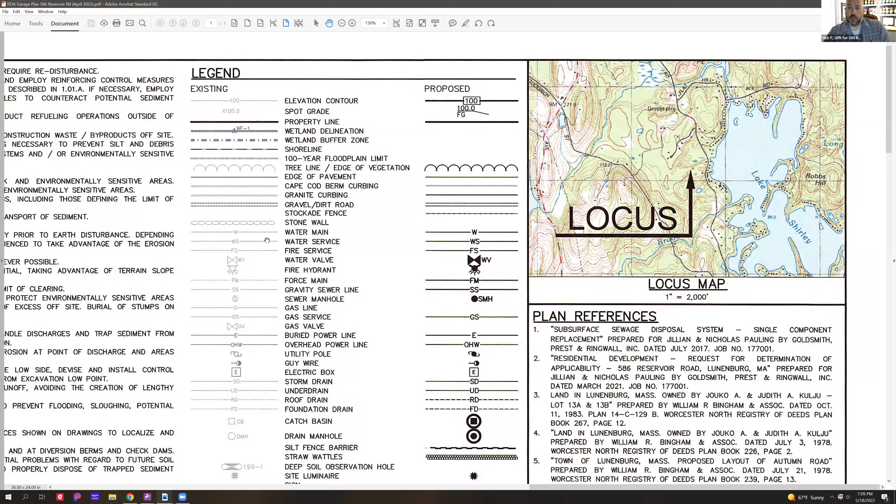Should see a portion of a plan - a locus. Everyone see that? So again, my name is Nick Pauling, owner, representative, all in one. It's an RDA, as Mr. Chairman read, it's on the west side of Lake Shirley. This is Reservoir Road here, this is Autumn Road. This is a large wetland. This is what I affectionately call the North Pole during the Christmas season with the tennis courts that put all the lights on it. I'm about 800 feet off the road, up about 40 feet.

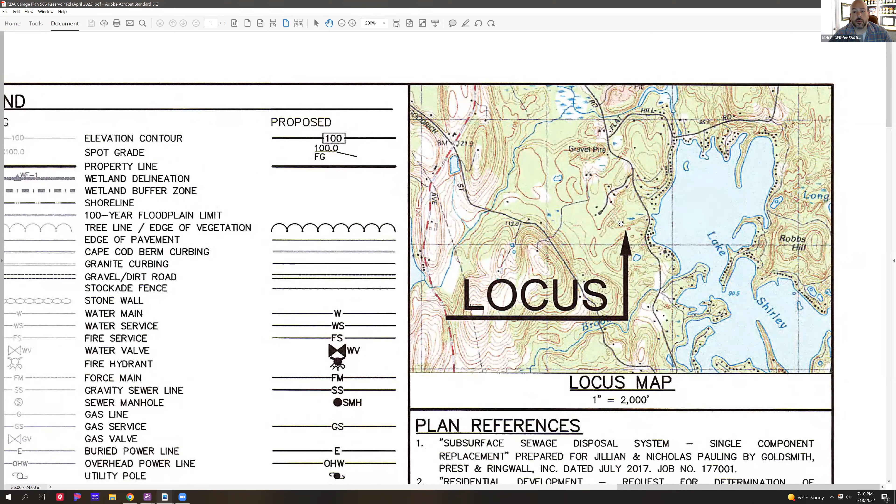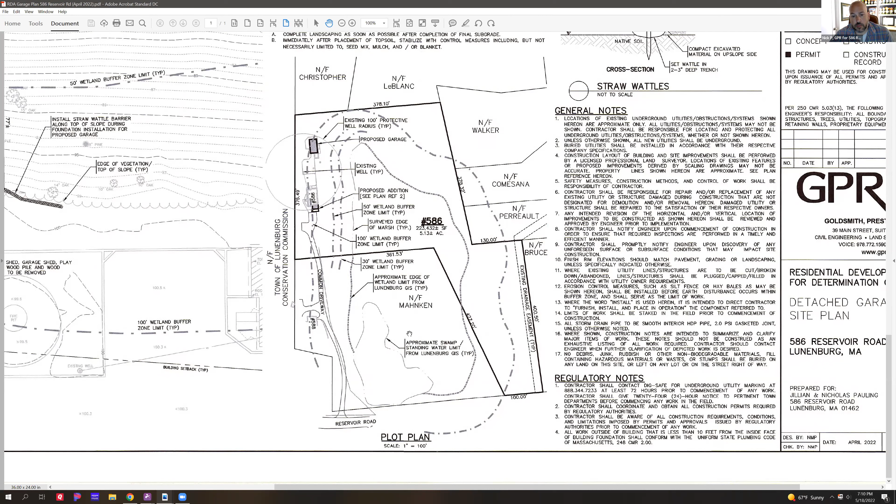What you'll notice if I come down to the plan here, Reservoir Road is now at the bottom. The property is accessed by a common drive that goes by my neighbor's property, comes into my main dwelling, and what we're talking about tonight is all located here in the rear of the dwelling or the property. What you'll notice is this is a large marsh area that encompasses the majority of my property as well as my neighbor that I share the common driveway with.

As we keep going over to the site plan, you'll notice there was a laundry list of things in the public notice, including what I call garage shed, a wood pile, a swing set shed, the play area, and then this is the former above ground pool. There was an 8x8 pool shed here, as well as an above ground deck. So the proposal is basically to clean up all of those areas and construct one large storage container. I called it a garage just because it will have a garage door. There's no everyday access to this.

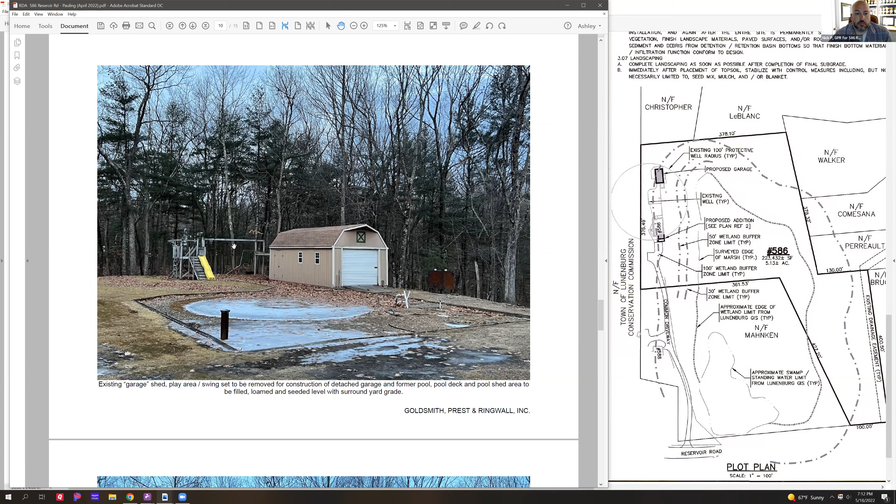Long term, hopefully there'll be a camper van parked there, but that will be driving across my lawn to get into it. I have the package that was submitted, the RDA package, included these photos. I think this speaks a little bit more - pardon that, I was planning on doing this last fall, hence the leaves and the ice. But what you'll notice in the foreground is the timber depressed area, the circle here is where the pool used to be. This is what I'm calling the garage, as it has a roll-up garage door. And then you'll see the swing set in the distance, side view, same garage shed.

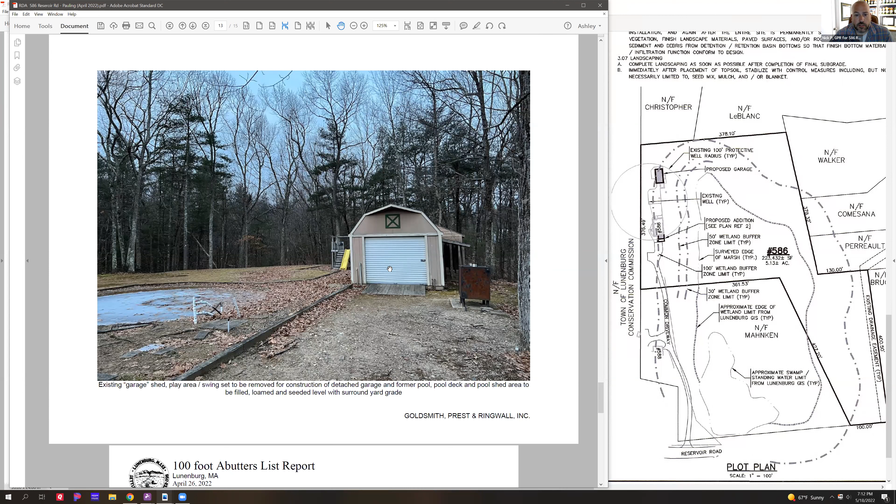This is the hidden play shed and the swing set. And as I continue to go down, what you'll notice is this is the rear view. This is the beginning of the slope that goes down to the marsh. And then this is just a front view again, which also shows the wood pile. So there's erosion control proposed along the top of this slope leading down to the marsh, while this is being demolished, excavated to put in the slab on grade foundation. This depressed area here, you can kind of see the change in grade from the grass down to the stone area where the pool used to be. The removal of all these subsurface pipes, really just trying to clean up the outside yard.

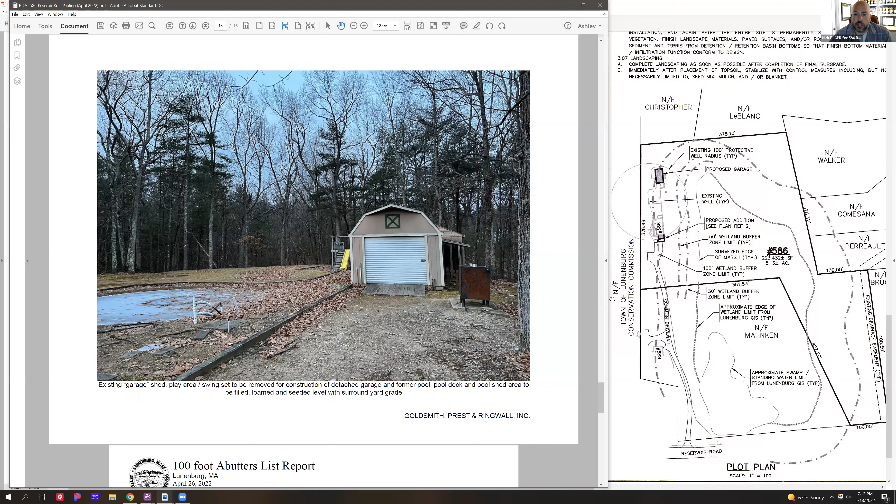That's the application. I can certainly change from this to the plan or anything else, or answer any specific questions the commission may have.

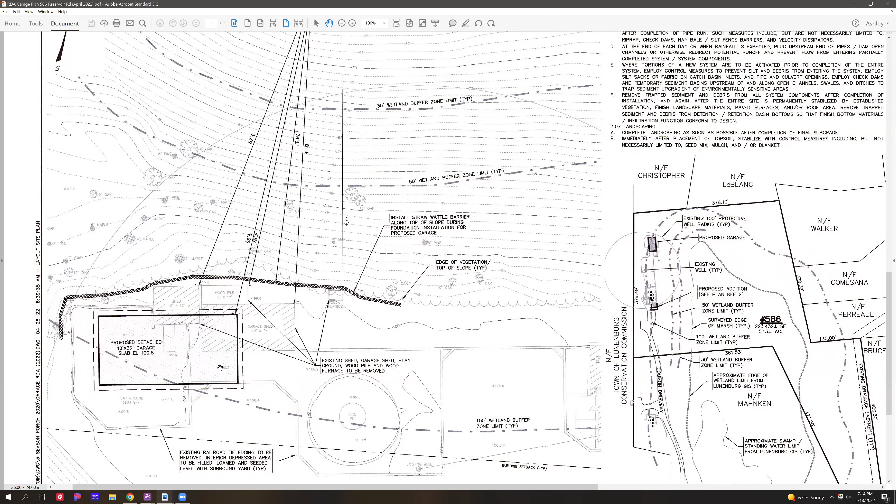Just a quick question, Nick. The original application we have on file, which I brought up, was showing some work in front of the house - a deck and things like that. Was that removed from this application?

No, it was actually an application that I submitted and you issued a negative determination in March of 2021. During that time, as you know, some things went a little crazy. I've ordered windows for that, but they've taken 18 weeks, so that is momentary as far as work.

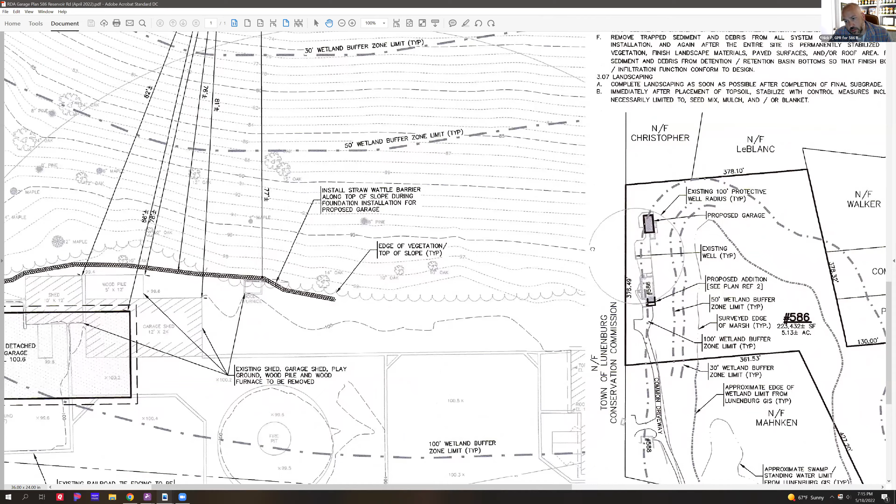If I zoom in on this picture, this reference here - proposed addition, see plan reference 2 - that was this area. So that was previously approved. Yes, sir. So that whole application then was a previous application. It appeared so, yes.

I don't have any further questions. When are you looking to do this - this summer? Hopefully, if the materials are available, the contractor doing the addition is able and willing to do this. We'll see if I can harvest from the money tree to actually make it happen.

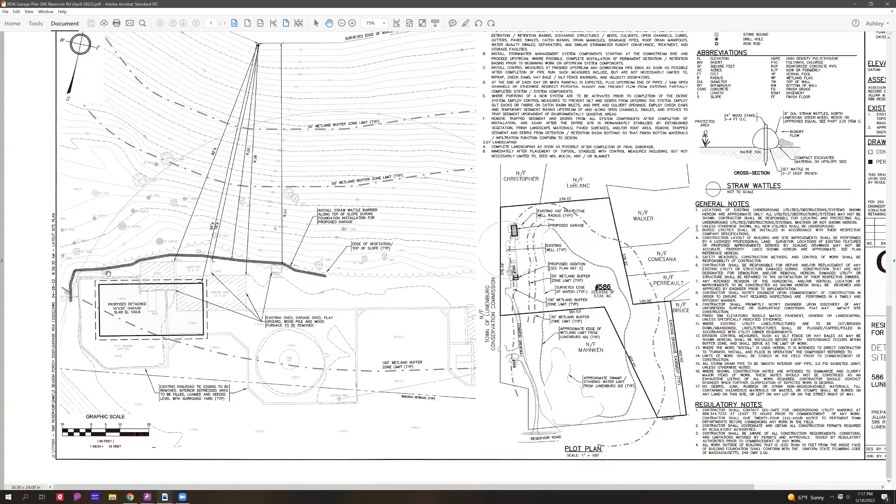Okay, great. Seeing no other questions or comments from commissioners or public, I will accept a motion for a negative determination. So moved. Second. Motion by Jack, second by, sounded like Katie. Yep. All right, roll call vote.

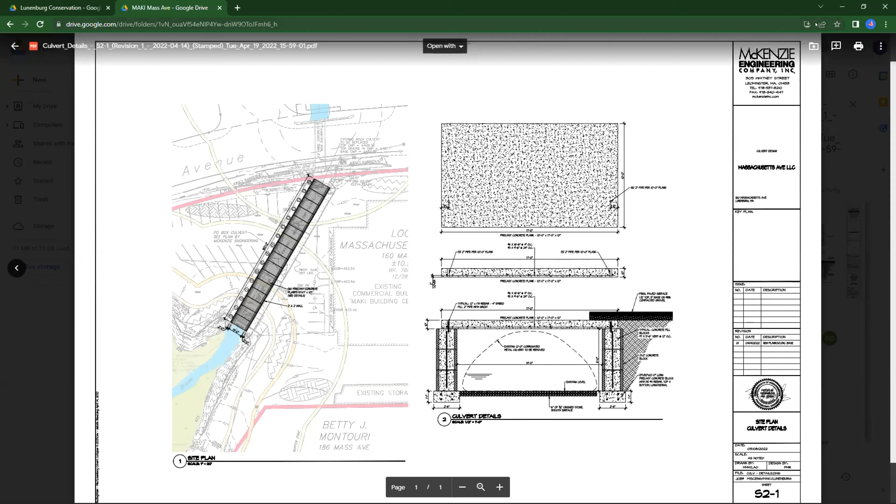So at this point, I think it would be safe to close the hearing and issue an order of conditions, if the commission so desires. At this point, do we have any questions or comments from commissioners? I'm seeing no hands. Any questions or comments on 160 Mass Ave from the public?

I see none. At this point, I will accept approval of this notice of intent with a standard boilerplate order of conditions for 160 Mass Ave.

So moved. Second. We have a motion and a second. Any other discussion? Seeing none, roll call vote.

Patty Adams, aye. Katie Childs, aye. Jack Rabbit, aye. Jeff Viviano, aye. Mike LaRouche, aye. And I for myself. All right, Matt will issue that order of conditions for you.

Okay, thank you. You're very welcome. Thank you, gentlemen. Okay, have a good night. You too.

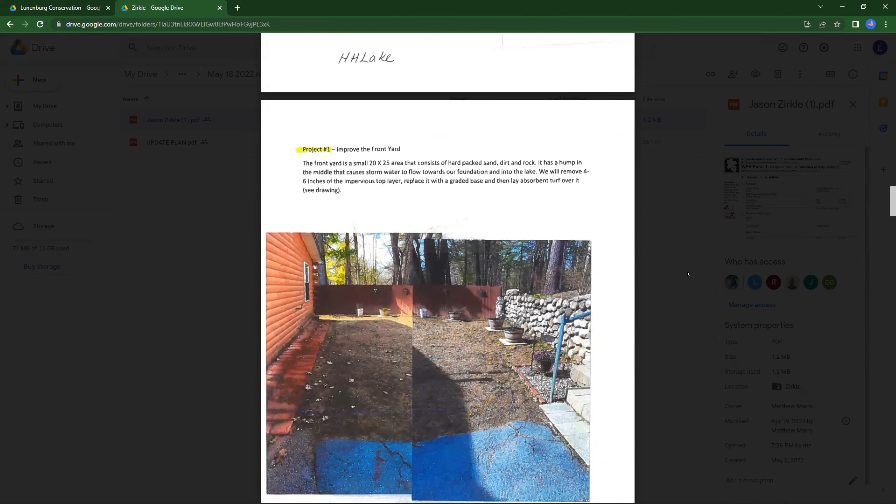If you could scroll down a little bit. Keep going. All right, yeah, at the top of that page it's kind of a description of what the pit is going to be, and at the top there is the install drainage area. There was a second page I had submitted with the updated buffer zone pages that just kind of showed the pit's 4 feet deep by 4 foot wide, the full width of that driveway area, filled up with some stone to try to catch some of this stormwater that you see running down through there.

Rich, I got it, just give me a minute to upload. Okay, and it's gonna go from the house out to the edge, out to the garage, basically. Yes, sir. Okay?

And you're just vinyl siding this garage here? Yes, sir. And the little shed that's up there, that's also number 4, just vinyl sided as well to match. Okay, no roof work, no drainage work, no digging, just putting vinyl siding on it?

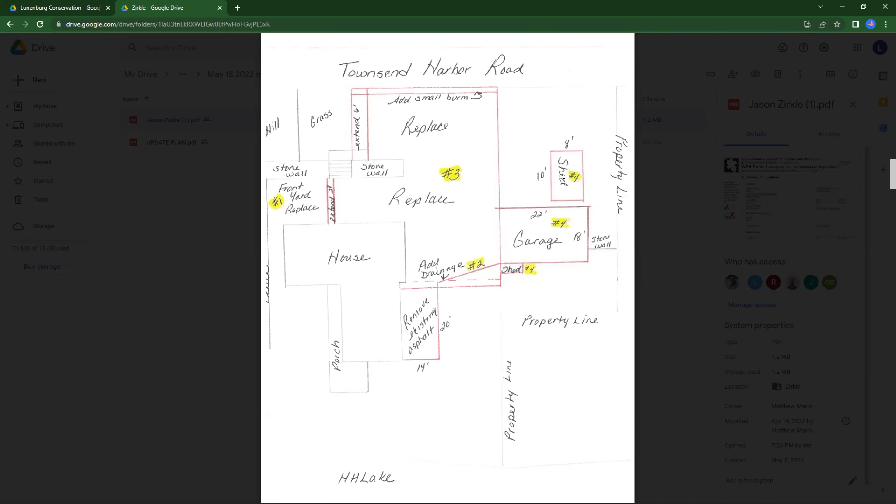The shed up at the top there does have a lot of moss on it. I would like to replace the shingles. I don't think they need to actually be removed, it just should be able to go right over the top of them. Okay. Yeah, as long as you're not doing any groundwork, you really don't need any approval from us for siding the house or putting a roof on it, or replacing the roof that's there. Okay, thank you, sir.

Okay, the only part that I personally have a little bit of a problem with is this berm that's redirecting the water flow from Townsend Harbor. I personally, as one member, might suggest trying to talk with the DPW just to make sure that we're not moving that water to some other place that's going to cause a problem.

Okay, yes. Somebody else had mentioned also talking to DPW about that, adding a berm there or something. I know when they just repaved Townsend Harbor Road all the way through, there were several areas where they added stuff like that onto other people's property. I was just hoping, once we get the driveway replaced, about getting that done. I didn't want them to add it now on the existing driveway where it's going to be removed.

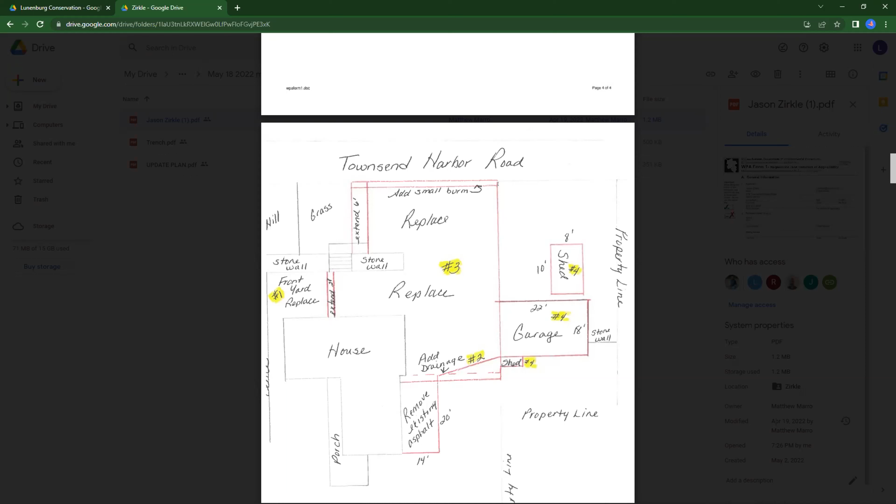Rich, on the cloud I just uploaded a file that says trench, that was the second page. Okay. Yes, I don't think I can rotate this. I can't, what the? All right, try right-clicking on it, Richard, that might help.

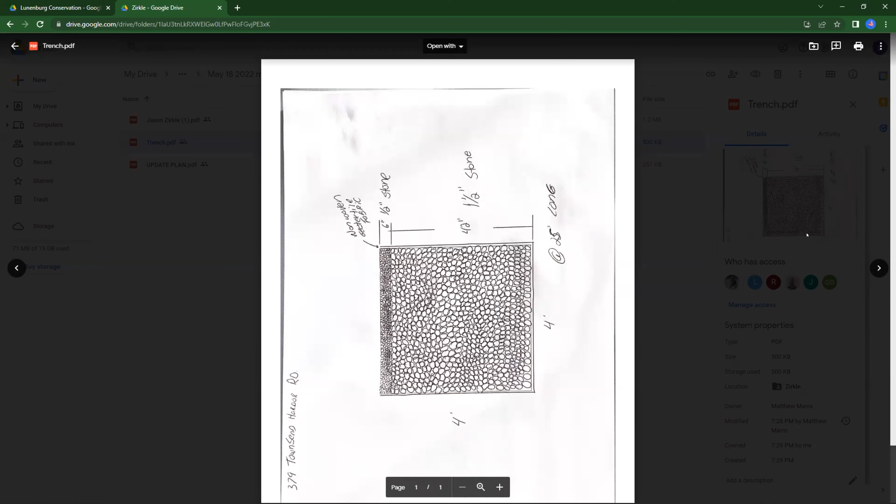Yeah, unfortunately, without opening it I'm not sure, but it's pretty straightforward. The dimensions are gonna be 48 inches by 48 inches, filled with stone, with geotextile fabric on 3 sides to keep the soil from infiltrating. Yes, sir. And there will be no outflow from the trench, the trench is just to allow percolation into the soil. Yes, sir. Okay.

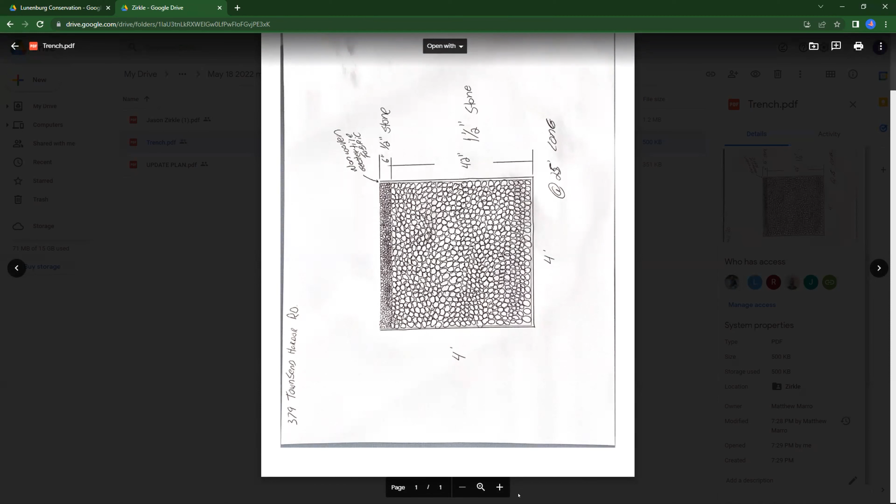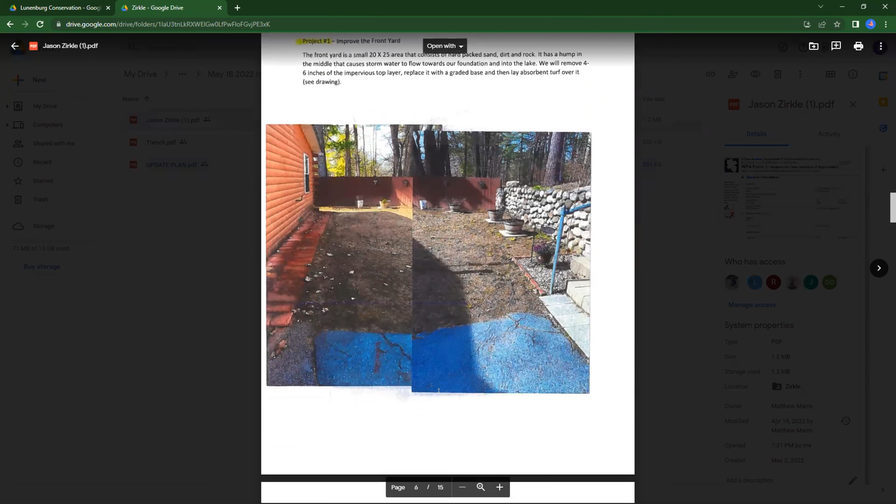Mr. Chairman, this is Jeff, I just had one question. Yeah, go ahead, Jeff. If you go back to the pictures where he wants to put that little swale in by the house, is that where those red bricks are? Let me just pop back here, so it's kind of a split shot of the front yard. Yeah, right there, is that where you're intending to put that swale in by those, like where the bricks are?

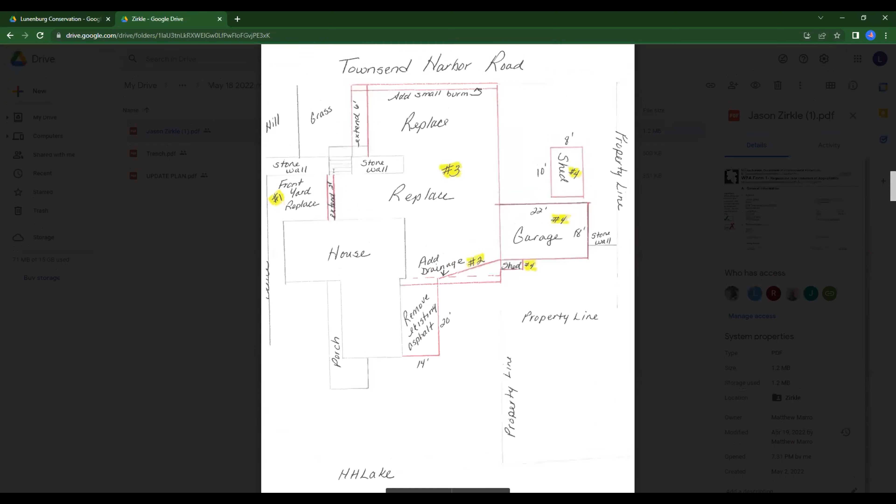No, sir, this area here is just where we had petitioned to replace the couple of extra feet of asphalt to get out past where those stairs are right there. And then that front yard replace area was actually just some turf put down. That's where my septic system is, and it's just all sand, so there's no grass growing there, so we were just gonna roll out some turf just to make it look decent compared to what's there.

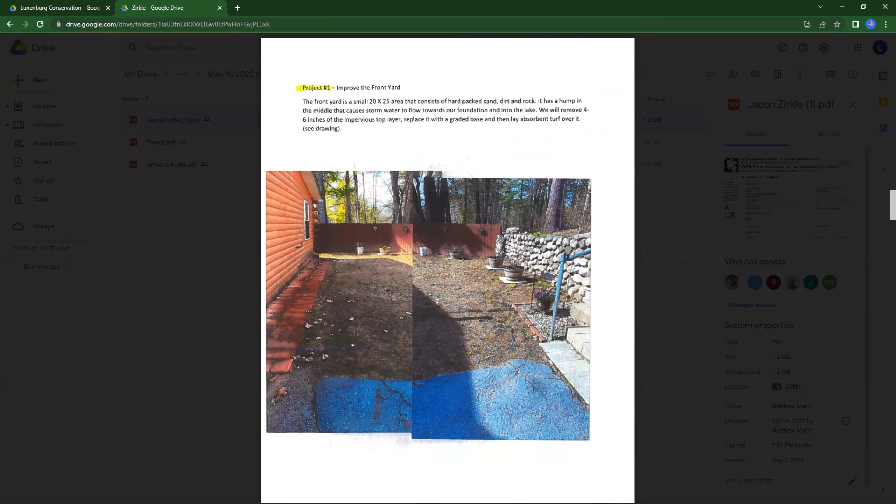Okay. Yeah, I saw the turf today when I was out on site with Nadia, I was just wondering what that was for. That's for that area there, sir. There's two rolls of turf there. And this is where you're putting it? Yes. Okay, all right, thanks, Mr. Chairman. You're welcome, Jeff.

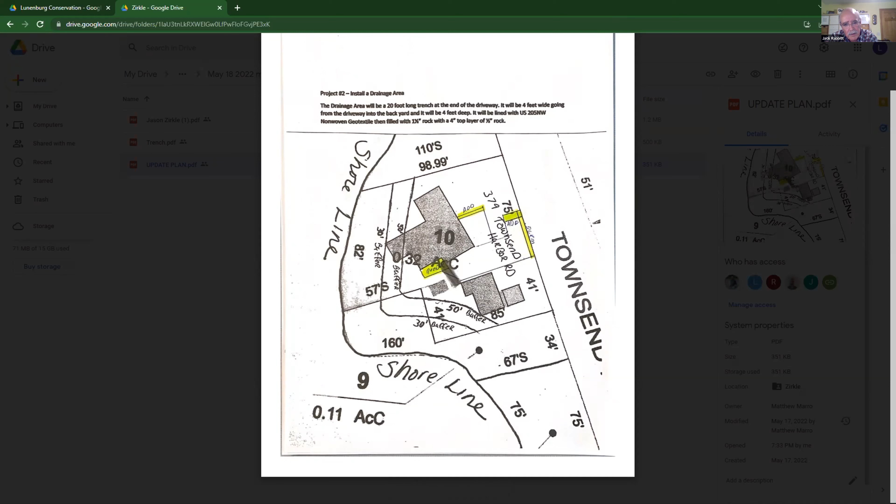Mr. Chairman, if we could also note that pit they dug was within the 30 foot mark, and I don't believe there was a permit pulled for that. All right, and where is the pit, Jack? It's not on the property we're discussing. If you follow that about 30 feet, it runs basically down towards the lake. In fact, one of the pictures would show that.

I was kind of interested in that, but I haven't really pursued it. If you take a look, Mr. Chairman, keep going, I believe you can see part of that pit right there by the dock area. He's dug quite a bit of a trench all the way down through. I thought, oh, that's interesting. Somebody's going to have had a couple of drinks and go and trip over it.

Exactly, well, exactly. I thought, okay, this is not on the property that we're looking at, but I noticed that it was a disturbed area within our no-touch zone. So I was just wondering, what are the plans to accommodate for the overflow in that area from your perspective? Because the water's going to go someplace, as our chairman pointed out last meeting.

So the trench is not on the applicant's property. That's correct, I didn't go any further with it. All right, so at this point, unless we took action against the neighbor's property, the applicant can't do anything on the neighbor's property to address the trench. Is that what I'm gathering? Yeah, that would be correct.

The water is flowing off that hill. If you look at the whole topography of the area, you've got a pretty steep decline. I'm betting it's a good 10 feet from the height of the road down to that area. So you're pulling water in no matter what. I did watch the video with the water pouring, sheeting off the roof of the applicant's house.

Rich, I did take a look at the topography available through the assessor's office, and he does have a knoll that basically turns the water, probably in the middle of your backyard, and it rises up and causes that water to push in exactly that direction. Yeah, you'd have to take a considerable amount of that knoll out to redirect the water to a different area, and then instead of running it through the neighbor's yard, it's just going to continue to run through my yard. That whole end over there is all lake and cove.

Right. The proposed trench - right now there's nothing there. So if this trench seems to be the issue, I hate to eliminate it because I'm assuming it's going to catch a lot of this runoff and slow down the erosion that's occurring here. But...

Plus you're pulling up some of the blacktop that's going downhill and removing that as well, right Jason? Yes, there's almost a 300 square foot area of blacktop being removed, plus you put in the other piece, so you're adding more percolation capability there.

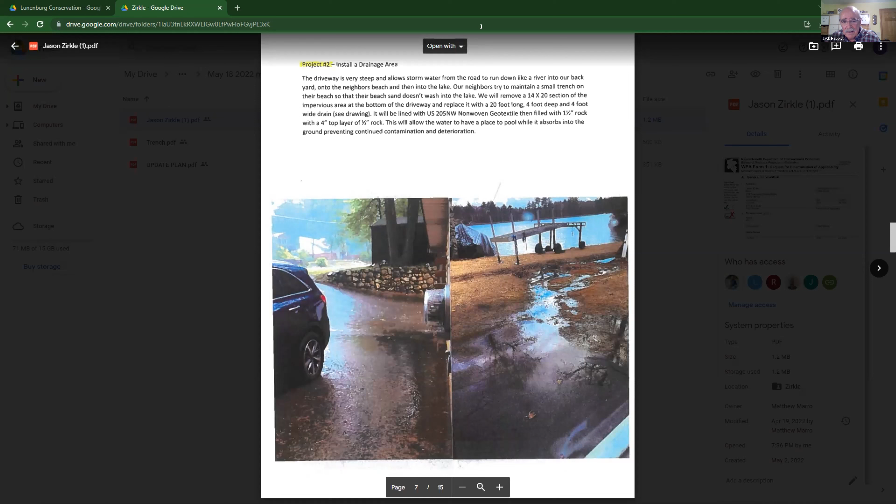Since there's no other outflow to attach to, are you going to put another storm drain in? Should we ask the town to put a storm drain in? It's coming off the road.

Okay, so moving forward at this point, are there any other questions from commissioners? Please raise your hand. Seeing none, any other questions from the public?

All right, seeing none, I'll accept the motion for a negative determination at 379 Townsend Harbor Road. So moved. Second. Motion by Jack, second by Patty, roll call vote.

Patricia Adams, aye. Katie Childs, aye. Jack Rabbit, aye. Jeff Viviano... Mike LaRouche... and I for myself, that's 1, 2, 3, 4.

All right, that was an aye for me. Oh, Rich, what'd you vote? Aye, I voted aye. Okay, Jeff's still muted. Okay, I'm sorry, I voted aye. If I cut all out, alright, there. So 6 ayes.

Thank you very much. Have a good, good luck on it now, Jason. Tell us how it turns out. Thank you, I will. All right, moving forward to Rob.

Pursuant to Mass General Law, Chapter 131, Section 40, as amended, and the Lunenburg Wetland Bylaw and Regulations listed in Chapter 239, the Conservation Commission will hold a public hearing on a request for determination by David Blatt for the removal of trees at 411 Goodrich Street. Do we have somebody here for 411 Goodrich Street?

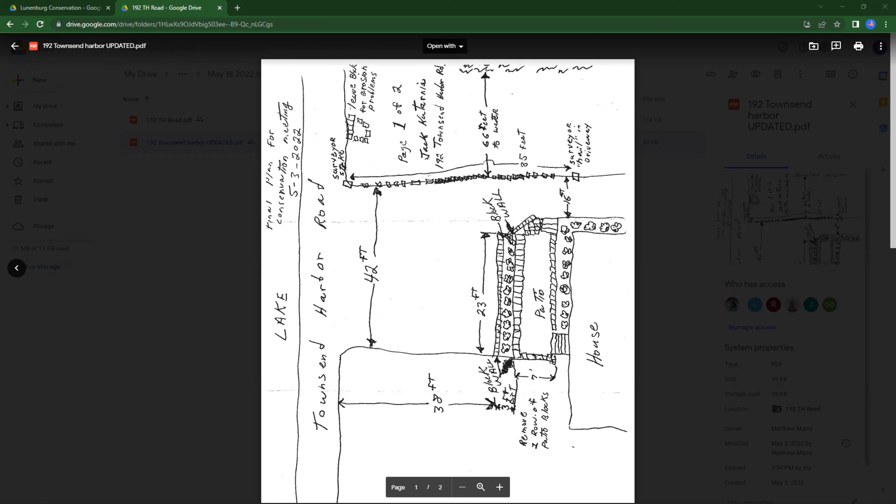The other one that hasn't responded, and again, I apologize, I can't remember which one it was, I have it in the file. I'm going to be sending it to town council for secondary action at this point. So essentially, we should have further updates coming for the next meeting because that was the deadline, the end of the month.

Updates on maintenance work at Hollis Road, Matt? We're still working to try to get people out there to do bids on replacing the windows. I believe Bob had a couple of leads he was pursuing. I'll review that with Bob over the course of the next week.

All right, great. Moving on to violations. 238 Fire Road 16. We do have the Magurns here. I'm assuming we can start with them. I believe I was not present at the last meeting unless something was discussed. Do we have a plan of the current site conditions and remediations proposed?

David Ross sent that out two weeks ago, yesterday, in fact. Should be on the Google Drive. All right, let me just bring this up. Does this look like it? It does. Okay.

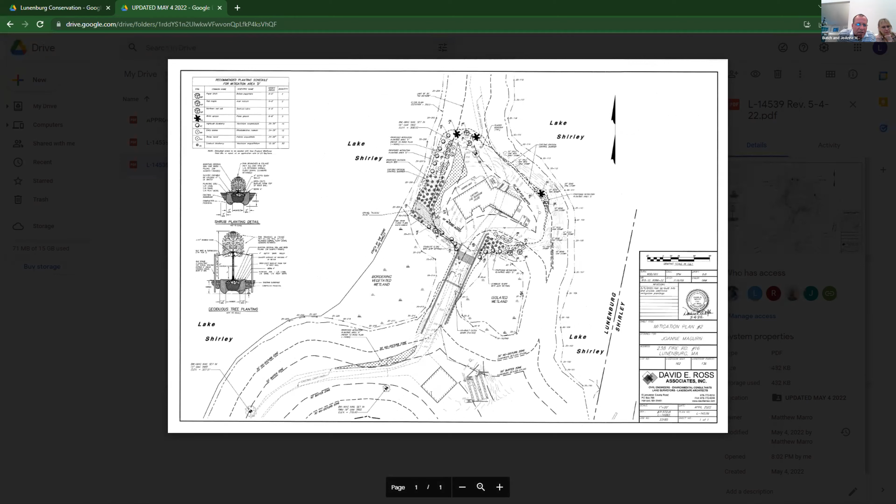Did Ross happen to present a narrative as to the extents of the violations? It's a little hard to see it with all of the stuff on here, to compare what we have to what was approved. I think other than what you see here, Rich, is the only thing he's prepared. However, if you bring the plan back a little bit, he did prepare a remediation area. He actually did the calculations for the area for the floodplain, which is on here.

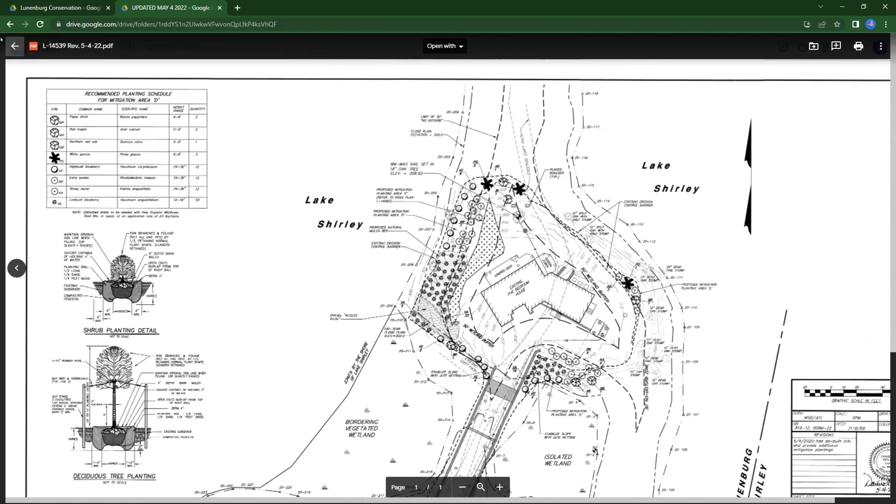I think what you're saying is the as-built, Rich. The alterations are outlined in the plan details. I think what you're looking for, you'll see on the as-built. That's another plan. Okay, here we go.

So you can see in the shaded area where the driveway was proposed and where the driveway is now. I think that's what you were questioning. Not sure.

Well, there was quite a bit of violation besides just the driveway, Jeff. There was all the grading over here on the northwest side, and there was grading and intrusion over here on the easterly side as well. Then you have to go to the southerly side. I just wanted you to see the approved plan, that's another plan if you wanted, yeah.

That has all the original grading. There you go. Yeah, so our grading violated here, up here, and took this whole berm out here. Exactly.

And at this point, there's no walkway, I don't believe, out to the water here that was approved. Sorry, Mr. Commissioner, can I comment on that? Certainly. So that was one of the things we last left off last year when this plan was approved, with the verbiage that we still have to present a dock and the access way to the lake. Okay, so in the new plan, that's what has been presented on the access to the lake.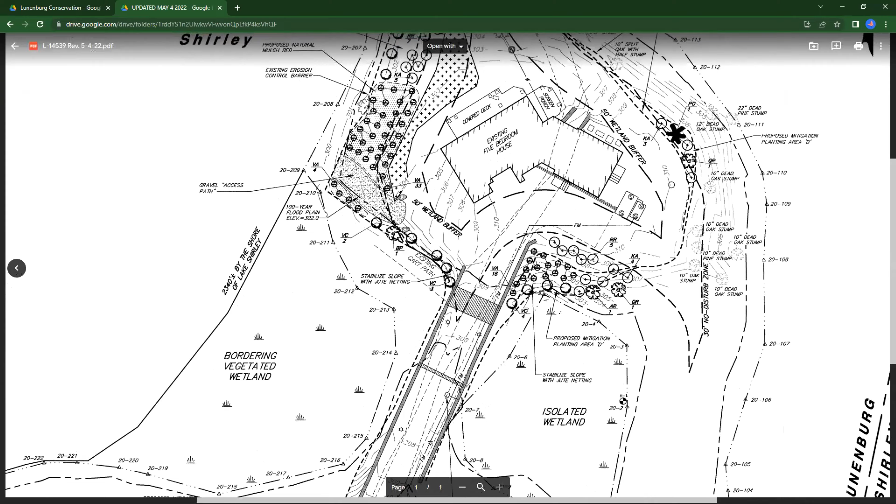The only other issue I wanted to raise, in the area where, if you could pull up the other plans, Rich, the planting ones. Yep, that's the one, thank you. So the planting plans look good, they have some positives to them.

The only thing I would recommend is in the area where you have wetland flag 20-208 on the left-hand side, the plantings suggested there appear to be low bush blueberry. If I recall correctly, there was denser, higher shrubbery that was greater in height than low bush blueberry. Low bush blueberry makes a great ground cover for hillside stabilization, but there were other shrubs that provided more natural shading to the area, which low bush blueberry won't accomplish. So you could scatter some low bush blueberry in, but I think that portion of the planting needs to be adjusted to have hardier plants, and maybe add a couple of extra trees there as well.

The vast majority of the other plantings look pretty decent. So would you recommend, Matt, putting another tree to the left of the existing tree bank there? One more tree? Is that what you're recommending?

Well, I'm recommending a lot more than one, but I would take this back to Brian Butler and have him draw something that's conducive to better cover, something that grows a little higher and is more in line with the habitat.

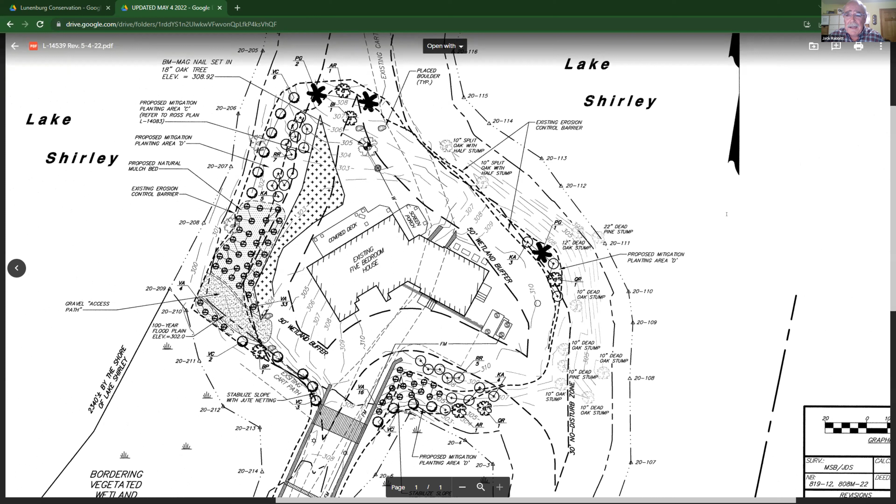Jack, okay, just stay on task, I'm sorry. I'll stop. Thank you, Mr. Chairman. All right, has your engineer signed on yet, Butch? Yes, I'm here. Okay, Brandon.

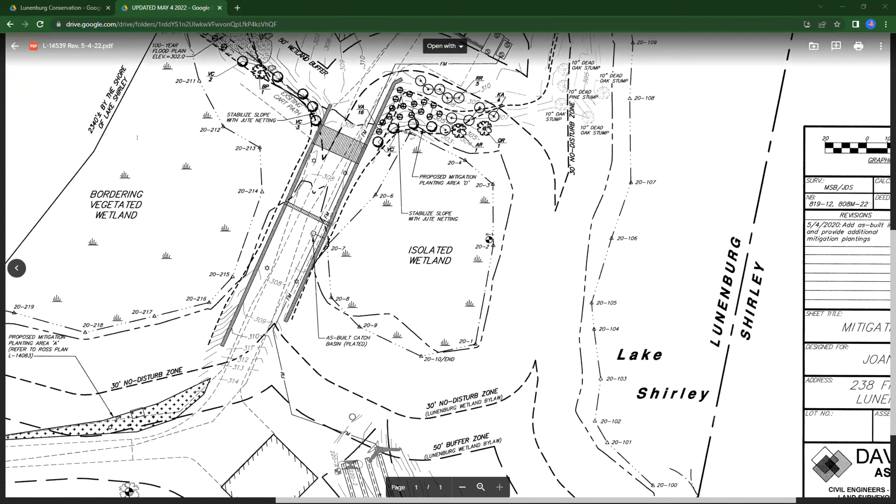Mr. Rabbit did bring up a point about the rest of the driveway. Was the rest of the driveway constructed as approved in the order of conditions? In terms of, we did an as-built survey from the existing garage to the house. So is the question pertaining to kind of south of the existing garage? I believe we had asked for an as-built of the site - the site would start where the driveway starts and comes out to the end of the peninsula here where the house is.

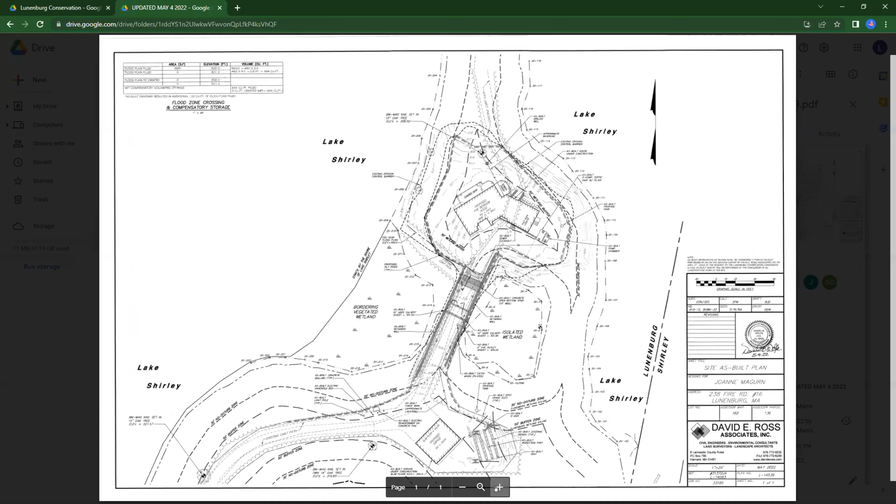Obviously not being on - I was on last week's meeting, that was very late, but prior to that we were not on the hearing. So our directive, what we did is we located the as-built driveway from the existing garage to the house, and we also picked up a couple of features - there was an electric transformer, some bollards, and some features like that. The rest of the driveway is pretty much exactly as shown in the approved plan, but we do not have an as-built of it. So you're stating that the driveway is constructed as was approved in the order of conditions, or you'll need to produce the as-built to prove that?

Yeah, we would obviously have to show that on an as-built plan. So, Mr. Commissioner, yeah, because I did mention this too when I was out on site, there's quite a few construction items that weren't on the plan as far as light poles and bollards and so on. Correct, yeah, so what we try to do is pick up all those features to present to you.

And we'll go through the rest of the commissioners. I myself would like to see the entire as-built for the site.

Just going over this quick, it looks like you did do some calculations on the expanded crossing. Yes, so it looks like we filled about another 985 square feet of floodplain. I think it was less than that, but okay.

What was this figure right here? So that's what it is as-built. Okay, so obviously if you look at the approved plan, it's more than that, but it wasn't significantly more. It's 394 cubic feet of space. That is literally a pickup load. I want to say, and again this is my memory on the approved plan, I think it was like 272 on the approved plan.

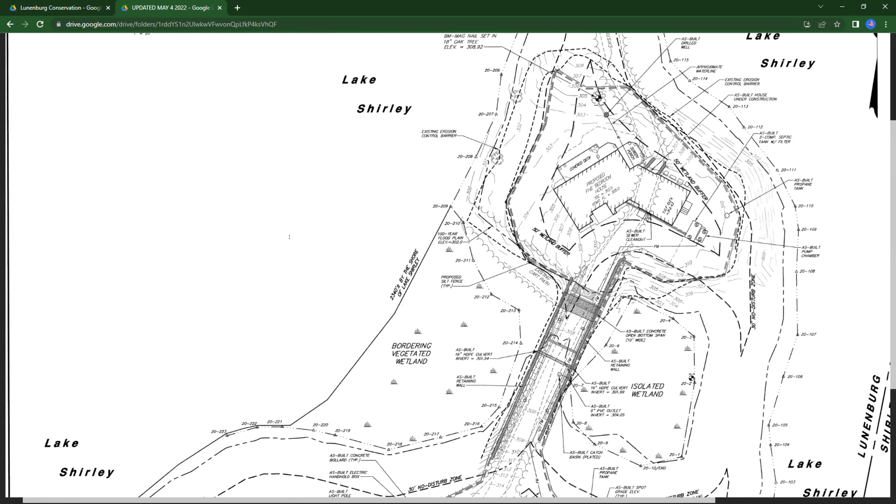Okay, so is 394 cubic feet the additional? No, so that's the total. That's what I'm trying to say. So if you subtract what we had shown on the approved plan from that number, that's what you'll see the additional is. Right, it's right below. It says as-built driveway resulted in an additional 122 cubic feet within the floodplain.

Okay, and where did we make up for that on the remediation plan? So there's been no flood compensation calcs as far as showing an area to provide for that additional storage. I know, and Neil from our office was involved in permitting this, and looking at that flood storage over the entire lake, my understanding is the commission did not want to have a compensation area excavated out to attenuate for that fill. If that's something now that we want to look at and show an area to excavate out to recreate that flood storage, we can certainly do that.

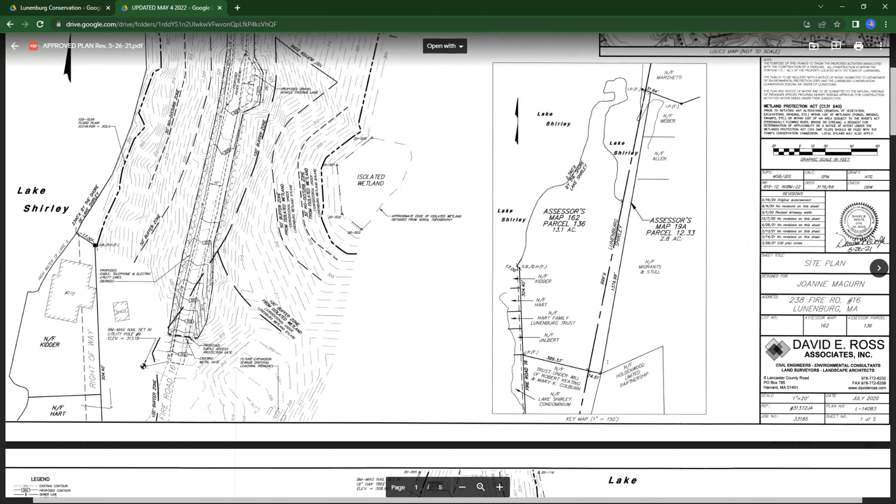Okay, that was the pickup load, the 4.5 yards, the 122 cubic. And also, just real quick, in terms of as-builting the rest of the drive, as you know, we can shoot the limit of the erosion control. We can show roughly the grades going through, but at this point no pavement's down, no sub base, so there's really no as-built driveway to shoot, but we can certainly show what the existing grade is as you come down that driveway. But we can't really show the limits of what the driveway is until it's actually installed.

So you can't show what's been cleared until they put the 10-foot pavement in? Is that what you're saying? No, I'm saying we could certainly show what's cleared, and what I said is we can show the erosion control, the existing erosion control, and we can show some topo through there. But in terms of a driveway, it hasn't been installed yet.

Yes, I am. He made a statement that we did not look for floodplain compensation for what was filled. Generally, we always ask for floodplain compensation. Do you have any recollection of that at this point? I don't have any recollection. I have to review the minutes.

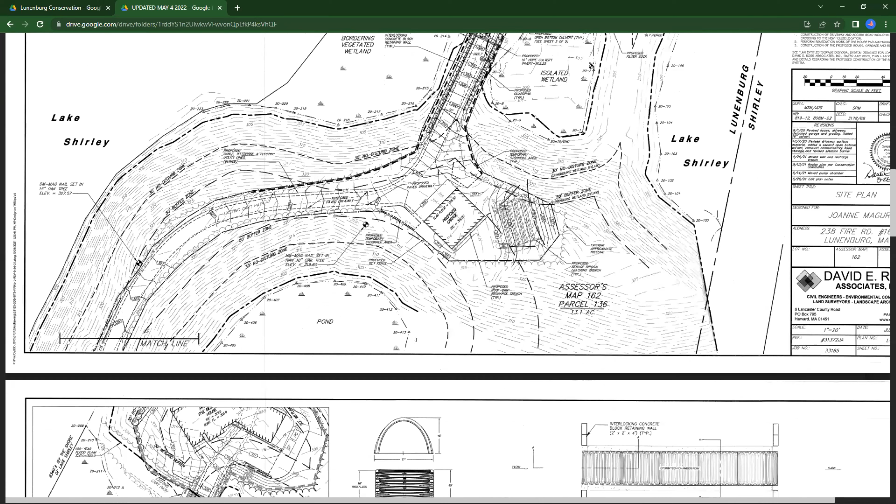Okay, yeah, the other thing to look at is on the approved plan, and basically I copied that same schedule where I show what the additional is. If you can go back to where that table was, what it breaks down is it outlines the amount of flood storage loss, and then identifies how much was compensated for. If you look at the approved plan, it basically has zero as the number of compensated flood storage. My understanding was just that it was relatively minimal, and the act of going in and recreating that.

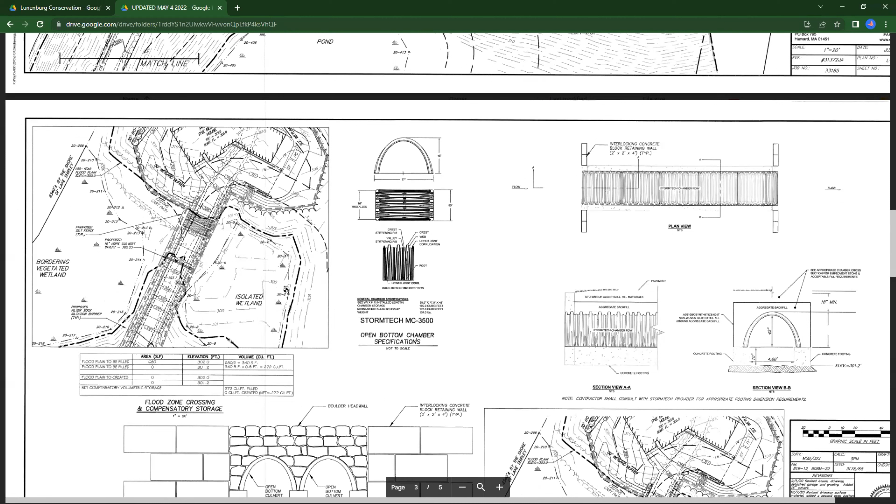So you see there, it says floodplain to be created, and it says zero. Rich, I do seem to recall there was some discussion about recreating floodplain, and the only area they were going to look to do it would have been in BVW. At that point the commission was concerned, but what the final conclusion was, I don't recall. I'd have to look at the minutes. Okay, yeah, so I'll let you look at that. Myself, I generally always call for floodplain compensation to be added.

All right, so at this point, it looks like we're looking for some as-built information on the remaining parts of the driveway.

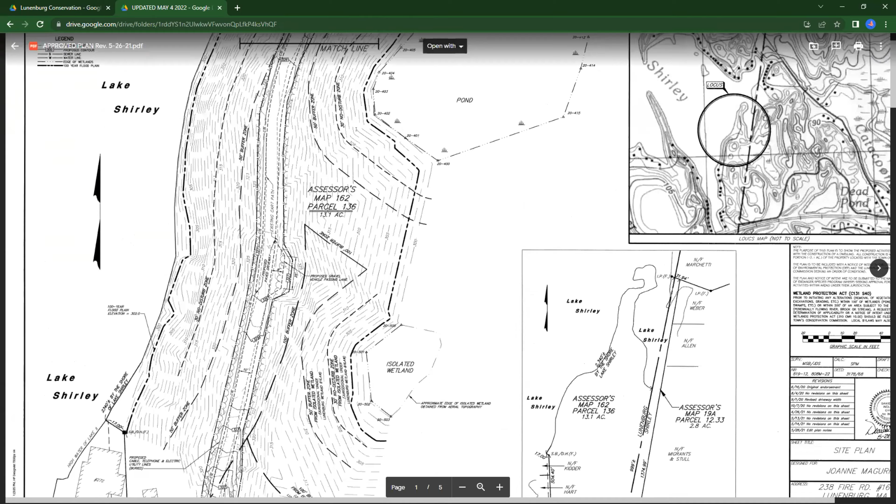I'll open it up. I see Jeff Viviano has his hand up. Yeah, Rich, this is just for me, but maybe for others. If Butch can show that picture, if you have a picture from the lake looking at your lot, a picture's worth a thousand words. Can you share your screen, and do you possibly have a picture with that?

Is Butch there? I am, I'm looking for it. Okay. While he's looking, Jack, you had a comment?

Yeah, just a quick question with regard to the driveway location on the lot in front of the house. I know I can't see it. Rich, does it need to be enlarged or something, or I just don't see where that driveway's been placed? The driveway within the crossing? No, not the crossing, in front of the house. Where is that? Where is it connecting? How is it running on the property? What's the size? What are we dealing with here?

So again, same as what we were talking about on the access road, at the moment there is no as-built driveway there. Right.

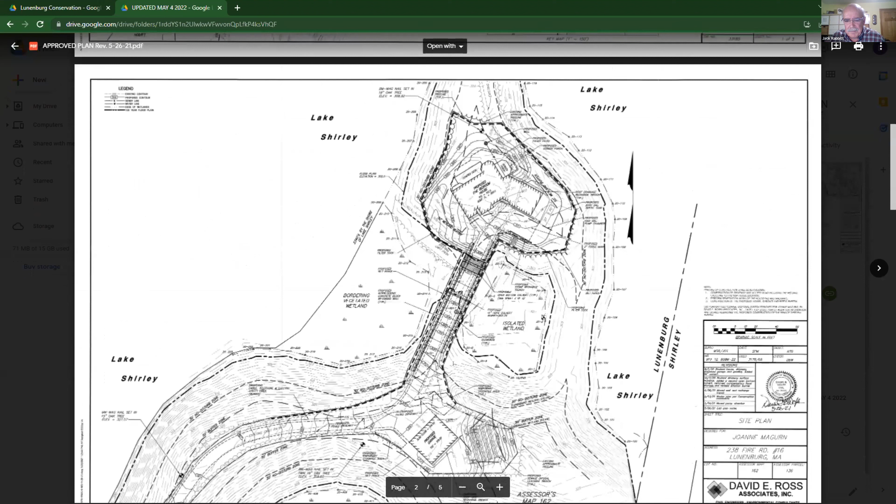So the assumption would be 10 feet with 2 foot buffer on each side? Well, I think what would happen is they would construct the driveway based on the footprint of the approved plan. And stay within the 50 feet, huh? I believe it's outside of the 50. Outside of the 50? Yeah, I think that was one of the... No, I don't think it's, so yeah, outside of the 50.

It's not, because the 50 runs along the edge of the house here. Yes, yes, yep. Sorry, I was thinking of 30, but yes, this is within the 50. Yep, it's approved.

So it looks like the wall is in the location that it was approved. Where they haven't paved, it's just graded out front of the house at this point, so it's really hard to tell, but it has to be as was approved. Right, and there's nothing in terms of a driveway identified. Well, and anything within, yeah, this is the approved plan, Jack, this dotted line right here. This is the paved area, right here. Okay.

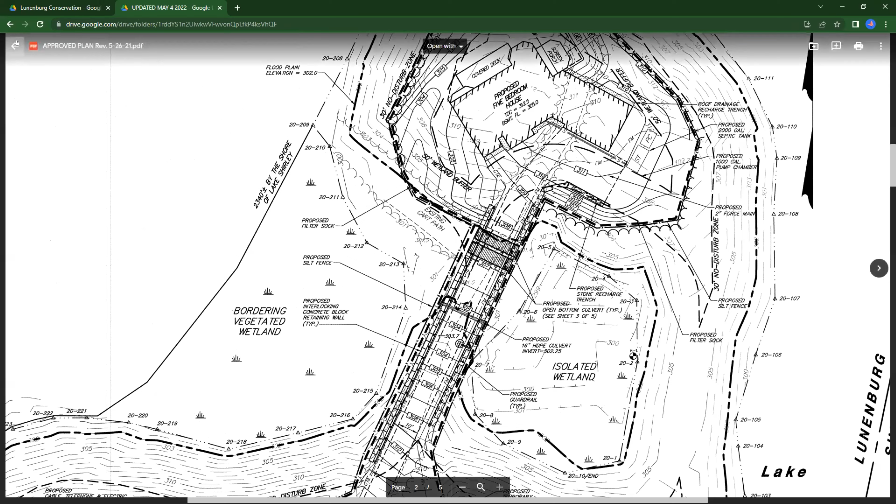And I would imagine they have a walkway going to the door here. Sure, correct. Okay, thank you. Sorry, just didn't see it. Yep, no, like I said, it looks like, because there's the wall there. There's the wall there. This is the area they've got graded off for the driveway. We did add a couple, actually.

Is that propane tank on there? It looks like it is. I just have too much stuff on my screen. All right, yep, as-built propane tank right here. That's within the 50 foot. Yeah, that was not on the approved plan. Thank you for adding that, Butch.

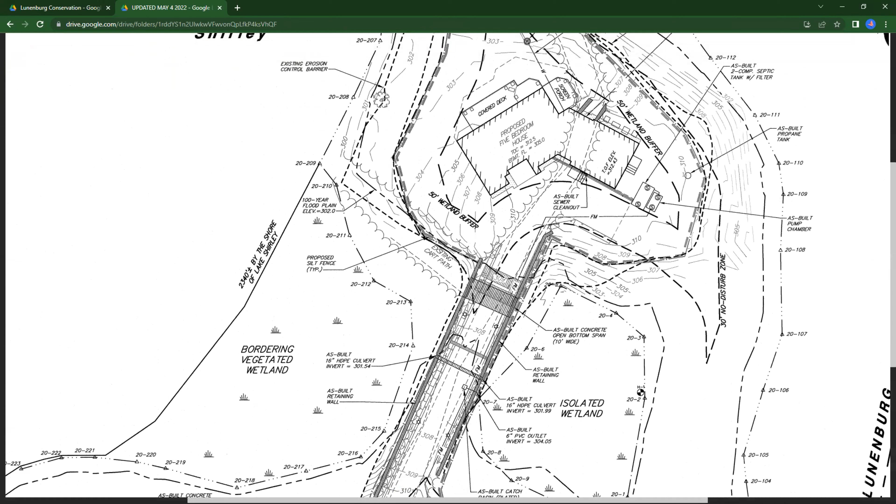Yeah, and what we did is I tried to show the proposed features on this as-built plan just in grayscale, so you can see that same dashed line for the driveway on the as-built plan in grayscale. Okay, there's another propane tank up by the garage as well. Mm-hmm. Yeah, there you go. Yep, that one there.

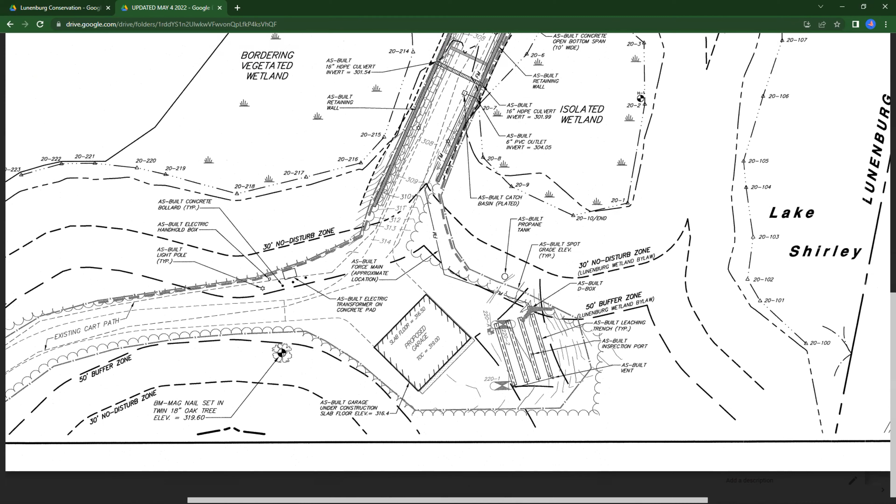Any luck, Butch? Oh yeah, as soon as I was allowed to share my screen. I just didn't want to bother everybody. You cannot share your screen while I look at this one, Sharon, sorry. Okay, you should be allowed to share now, Butch.

I just want you to put it back to the way it was approved. I totally agree with you, Rich. I'm very open to that.

So do you have any pictures from the lake, looking at the lot? I do.

Can you see that? Not yet, hold on. Still the old one. See that one? Are we still sharing? Am I sharing? You're sharing, but we're only seeing the old picture there. Okay, we're still seeing the same photo. Yeah, okay, that's why. I gotta put this one back up.

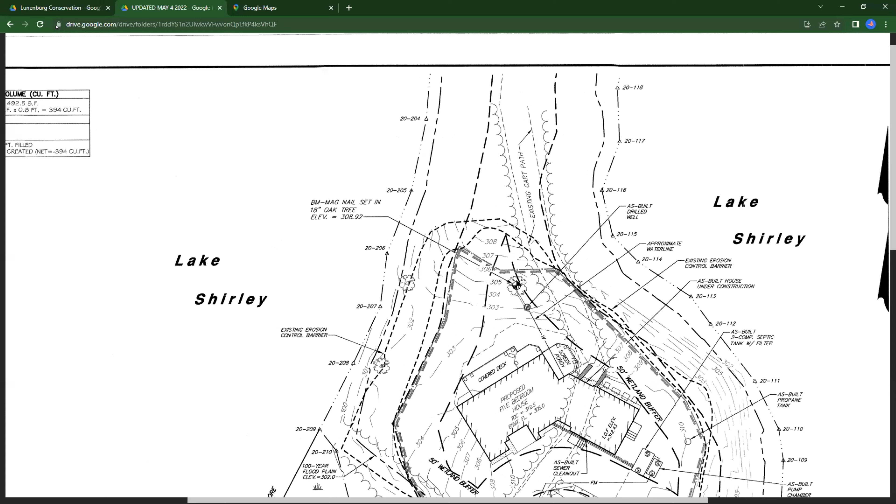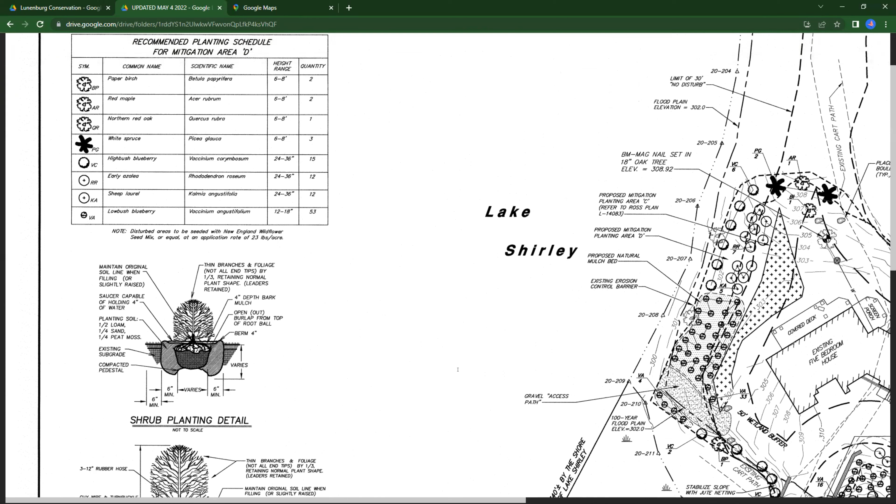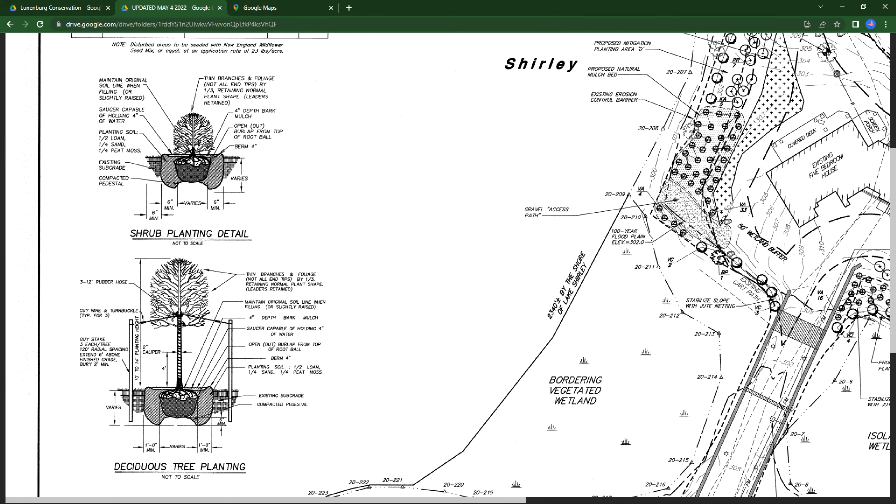If you look at the planting schedule, they all say 6 to 8 feet, but if you look at the deciduous tree planting sketch below, that detail shows 10 to 14 - that's just a typical planting detail. The actual height specification and size is based on the planting schedule. Gotcha, that'll help me out. Thank you. That's it, Rich.

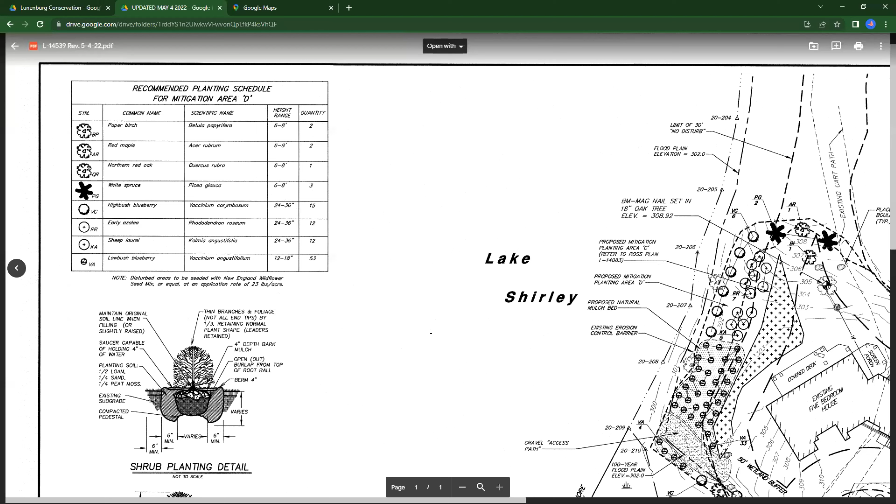The only point I'd make is that, and I know there's a dispute over where the erosion control is, based on the approved plan the erosion control barrier served as the limit of work, which would entail removal of vegetation. There was mitigation proposed in several areas to revegetate within that. Within the envelope of work, correct? Correct - and we're talking about this area outside here, which is all of the violation that was graded. Correct, in violation of the order of conditions.

So Jack, I see you have your hand up. Mr. Chairman, since we're sharing pictures, can we go into our drive and open my PowerPoint and share that? This one you're looking at was not the final version, as I shared with Matt - this was just quickly getting some pictures over to the chairman to show what had actually gone on. So if we're talking about before and after, that's what this PowerPoint is, but there are a few items that are missing.

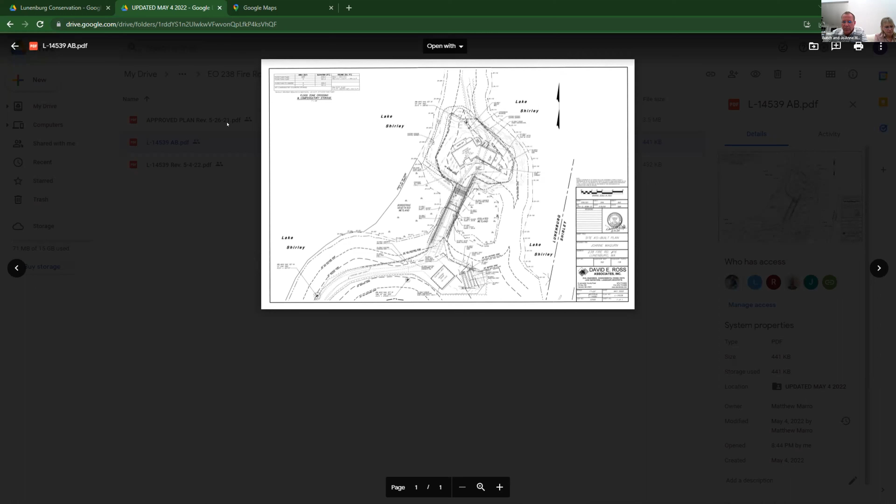Yes, can I just understand a question from the commission? Am I entitled to the limit of work from the erosion controls, going back to the original? And within the limit of work, I can remove trees, correct?

You can, outside of the 50-foot no-structure zone, I believe. It's either the 30-foot or the 50-foot. Right, fair enough. But continue your question.

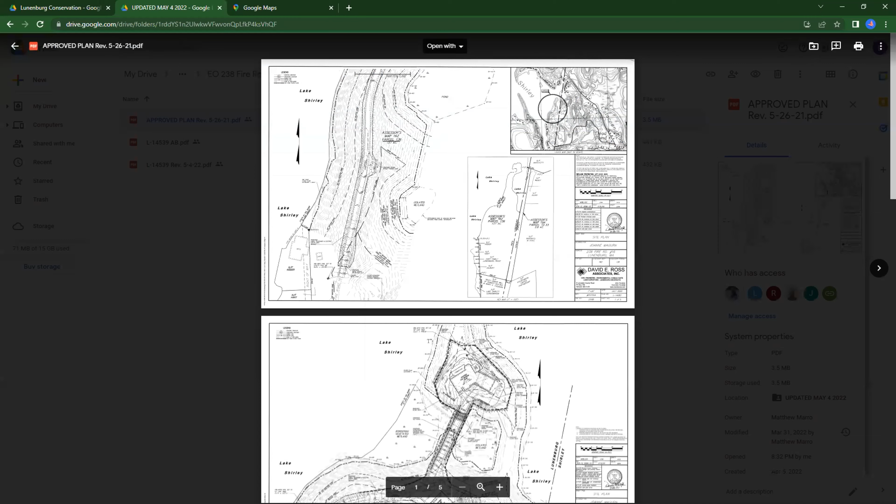I'm just trying to understand, because when we do the as-built of the driveway, you will clearly see that the erosion controls have not been moved one inch. The original placement of those has never been compromised. And I will answer Jack's question.

Some trees were removed, within the limit of work, and that's it. As long as it was on the approved plan and the order of conditions and it hasn't changed, that's fine. I will bet Jack $100,000 in an open public forum that driveway has not changed.

At this point, I think we'll stop that conversation until we get the as-built. As long as it's within the approved order of conditions, you're fine. So that's why I wanted to ask the question, as long as it's within the limit of work, I just wanted to find that out myself. So yes, and the erosion protection was within the limit of work, I believe, all along there.

Agreed. Okay, let me raise my hand. Okay, Jack. Mr. Chairman, if I might counter, we have in fact put erosion controls beyond the limit. Again, I'd like to just move this along, Jack. Until we get the order, until we get the as-built, we're arguing about things we're not sure of, on both sides.

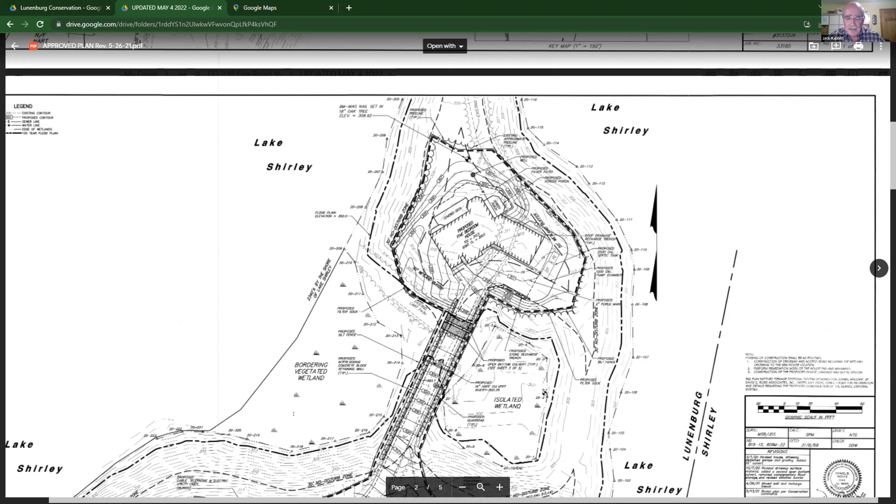They do not necessarily always indicate the limit of work or the scope of work. It's basically where we ask to have the controls based on the topography and the vegetation. I've never seen where it says that's as far as you can take it. It's been a guideline, but never absolute. It all depends on what's written on the approved plan and what we come back with as the limit of work.

Mr. Chairman? Yes, Mr. Viviano. I have one picture I'd like to share. Okay, go for it. Let's see, my first time doing this, so let me.

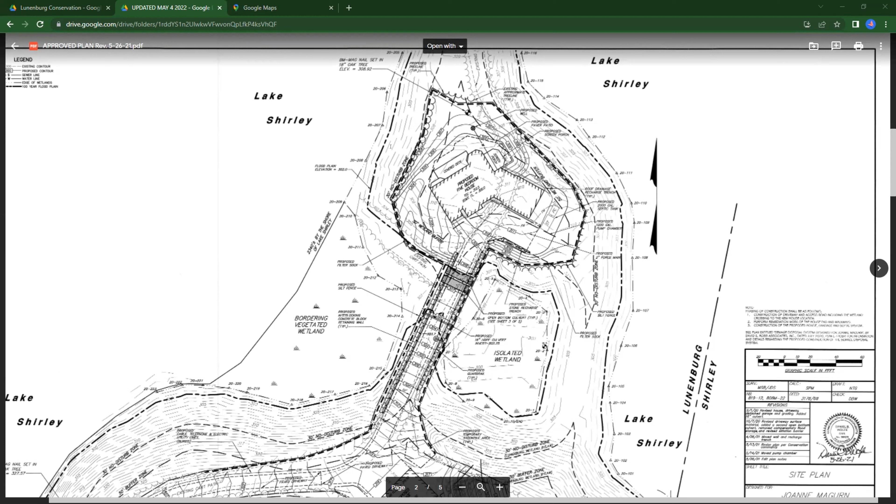Currently now it's basically, they've taken about 4 to 6 feet out of this berm right here and flattened it from the house right out to the edge of the lake. And again, a little more grading down through this area here. So that in the house envelope is what was done in violation of the order of conditions.

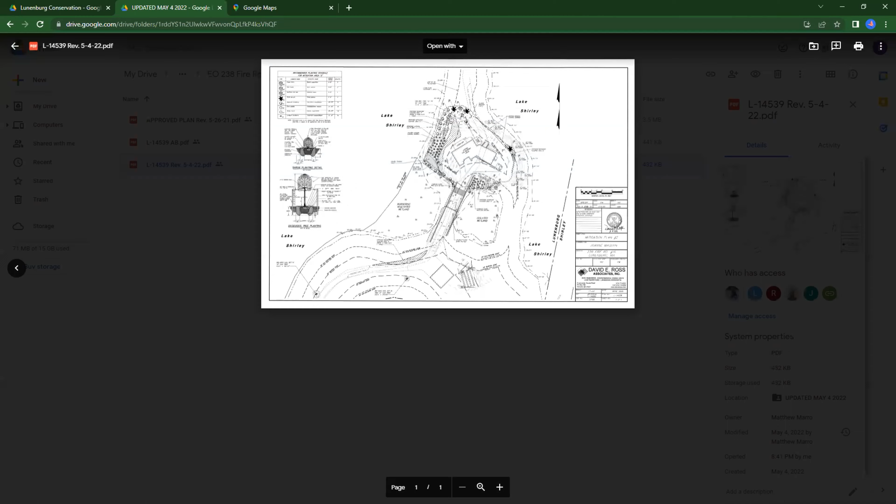So their remediation plan that they've submitted tonight has regrading in through here in this banking and stabilizing it with plantings. This area over here, they have it stabilized with plantings.

Looks like we have a couple boulders and some plants in through here, but they are not putting forth any remediation for the grade. Right now, the grade used to come up to 308 to 306 through here, and now it's 302. So 4 to 6 feet of fill has been removed from this area here.

And they have added a pathway at this point, but again, I would rather see us deal with the remediations and then they can resubmit for any additions or changes that they want to the existing order of conditions.

I sort of like that idea, Rich. Okay. And your feeling on the grading and the remediation as they've submitted it here?

It seems as if they're giving us less than what the commissioners would like, correct? And do we have any recourse in getting more remediation in those areas? Or are we stuck with what has been suggested by the applicants?

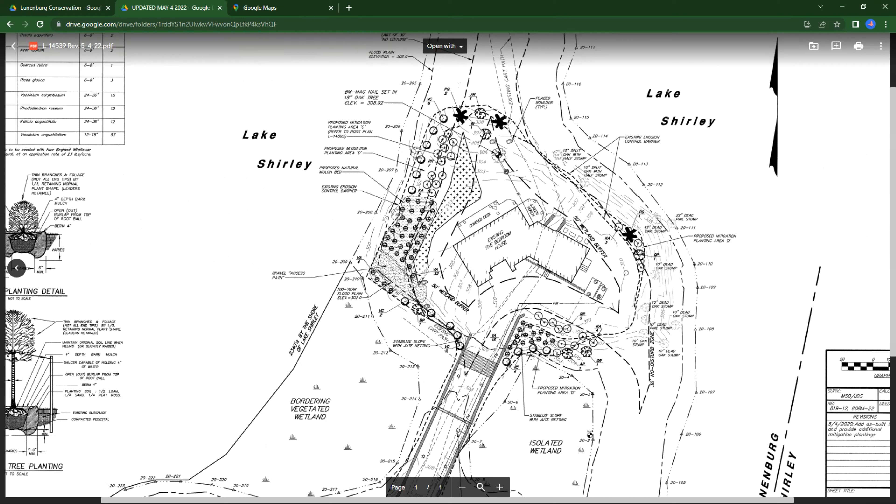I would like to see the grading replaced as was approved. I think it's a horrible precedent to set that we would allow this grading as it exists today to remain. It just furthers anybody moving forward to ask for forgiveness as opposed to permission as far as working in the water's edge. So I would like to see that grading replaced and revegetated, similar to what we have on site. I think there should be a few more trees along the water's edge.

I know there's contention as to what vegetation was there. I go back to the pre-existing site. There clearly was a canopy over this entire site. So there were certainly trees that were removed prior to some of the photographs. I can't say what they were, but we go back to pre-existing conditions. And again, the site was completely vegetated. You couldn't see any foundations. You couldn't see any concrete. You couldn't see anything else on there.

So there was a substantial canopy that was there that along the water's edge should be replaced with the foliage and the plant material in the understory needed to hold back the banking once it's replaced. So those are my thoughts and opinions on the remediation plan. At this point, everybody's had a chance to express what they're looking for.

It looks like we're kind of split as far as the grading portion of it goes. At this point, we need the finished as-built for the driveway. I'm going to recommend that a plan be amended for the grading to be replaced.

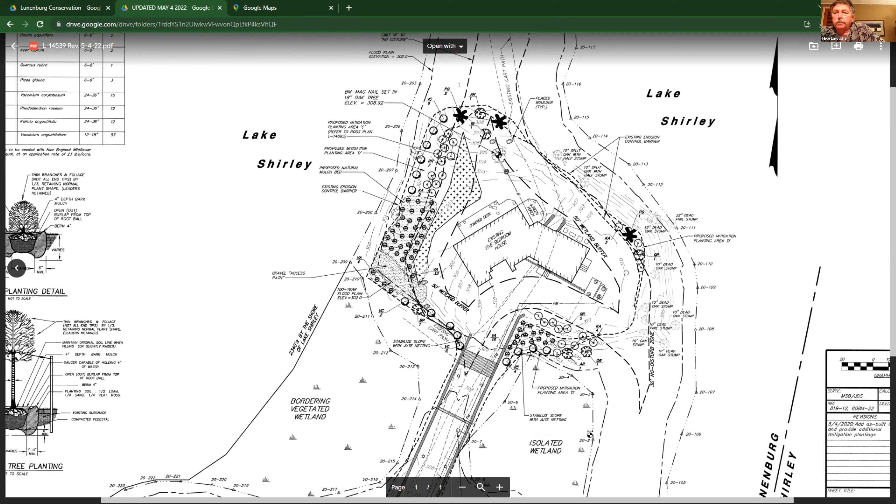Again, I'm torn. If we could get that area to the north remediated, I would be fine with the grading as is, but that's, I guess, in Butch's hands. I guess my only problem with that large area up there, Jeff, is where it's right on the water's edge. I think they'd have a very hard time removing it and remediating it myself, but yeah.

So, but at this point, there is a majority looking to have the grading replaced on the west side, the lake side. So, I mean, it's a pretty ugly area, and it's not very well. It's mostly concrete. I think it'd be nice to get all that concrete out of there and get it revegetated. I think that would be outstanding. But without that, yeah. Yeah, this is Brandon.

My only comment on the grading, again, it's certainly your prerogative. But looking at the original plan, I don't know if that was a 3-to-1 slope, just in terms of bringing material in now. Obviously, we're going to plant on it, but in terms of risk of erosion, in terms of revegetating that, it's certainly less risk of erosion with it being a gentler, flatter grade through there.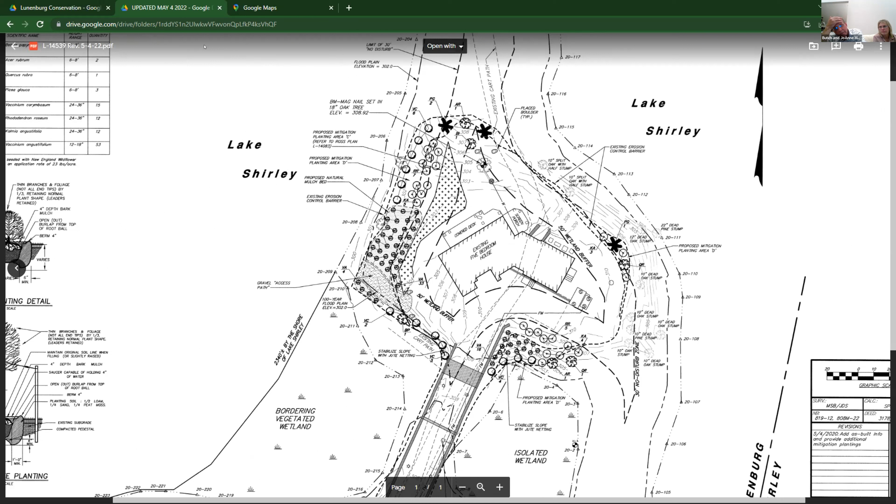Butch? So as Joanne has just stated, and what Jeff is asking now, did we talk about the bridge crossing? Because I'd like to be able to do this one more time. The summer's gone by us, the planting season is nearly beyond us, and we're gonna end up looking like this until next spring or next fall. And I'm already having some erosion control problems on these banks, as you well know, Rich. That was the whole purpose of putting in that riprap, just to stabilize some areas.

My feelings on a crossing are... so my feelings on a crossing, we can just go around the table really quick. It's not going to get pulled out. I personally would like to see the 394 cubic feet of floodplain filling be remediated somewhere here on the site. It's 122, Rich. Well, honestly, I'm generally, I fight for that floodplain, and you're not supposed to be filling it in. Rich, I really am. I'm fine doing what you want. If you want me to dig it out, I'll dig it out.

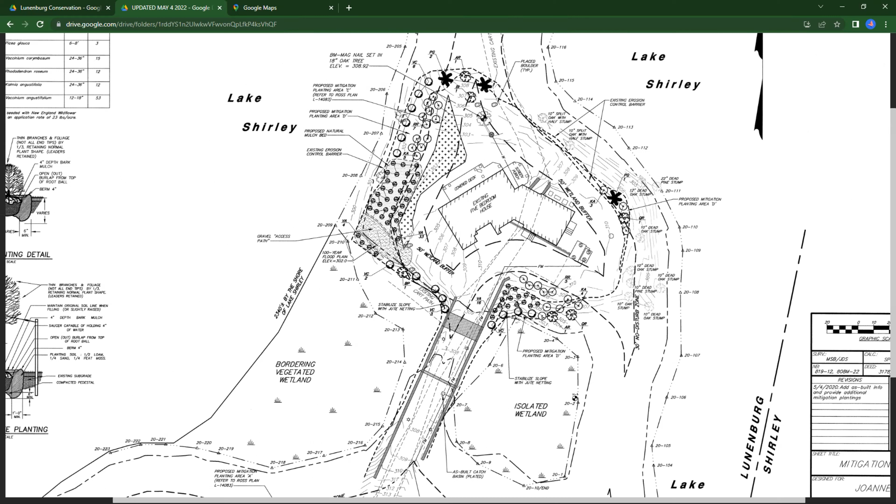Yep, so I'd like to see a proposed area for the floodplain storage remediation on the driveway. I don't think there's any way we're gonna fix the driveway, but again, it just adds to the problems. I've said enough about the violations as it stands. Does anybody else have a different proposal for the driveway other than just remediating the floodplain violation? I see no hands. Mr. Chairman, was that comment about the driveway or just the bridge? Are we talking crossing? Okay, yes.

Obviously I'm carrying some sort of anger, but I need to put that aside. It would not appear to be practical to tear the thing down or have them move it. I would rather see the rest of my driveway remediated to put it more in a natural habitat that was there before. Well, let's see if it's within the order of conditions first. Right, and so I'm okay with that. Okay with- Jeff, you have your hand up? Yeah, I guess just to educate, what could you possibly do to increase that floodplain area? I just don't see it, I guess. They have to dig out, Jeff, so they've filled in floodplain.

No, I have to understand that they compensate for that somewhere around the edge. I'm just trying to find a spot they could do it, I guess. I just don't see anything. Well, it's up to them to figure that out. I mean, again, you're not supposed to be filling in floodplain without compensating for it. No, I completely understand. So regardless, they have to compensate for the floodplain filling.

Can I make a proposal of the area right now, so we can get it on the drawing? Can I make a proposed area now, so we can get it on the drawing for the next submission of the drawings? Well, we're still waiting on other drawings, and if we're gonna be looking at regrading, we'll need to see the grade lines for where we're gonna be putting the grade back on the westerly side of the house. So at this point, wherever you and your engineer decide is the best spot for it, and your wetland specialist, Brian Butler.

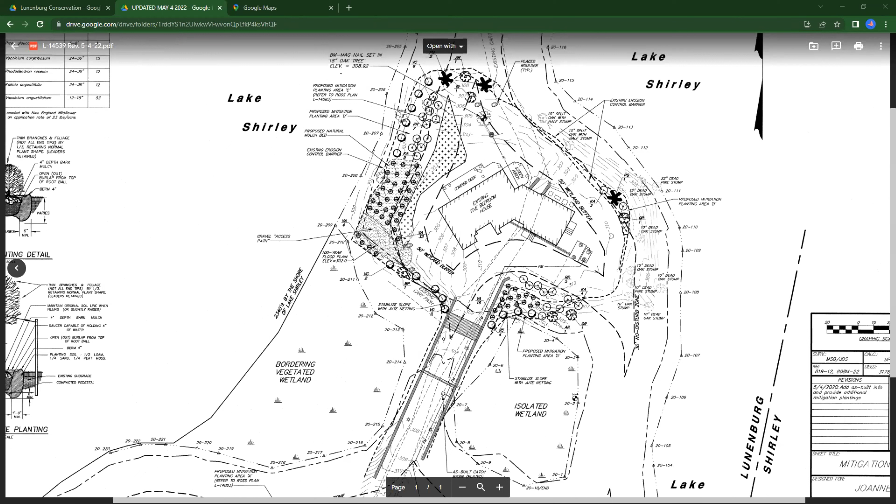I'd be happy to revegetate that whole entire area and get that wall out of there. If I'm doing it, I'm going to do it now, because it'll never get done afterwards, because after the slopes are all put back together and it's all vegetated and those trees that are proposed back there, you'll never get a machine back there. Right now I have to restabilize that area because I took those concrete areas out anyway, so that has not been restabilized. Do you want that wall out or not?

Mr. Chairman, Mr. Viviano, I'm pretty familiar with the property. I'm not sure if many of the other members are, but it's about 40 or 50 foot long, 3 foot high, and it's got 2 wing walls on it. It's just a concrete wall that's falling down. If he's willing to revegetate that area and remove all that concrete, I think that's huge, and that would easily be a bonus compared to what he's done to the property, if that area were to be reestablished and revegetated. That's my opinion.

I think if that's done, I kind of have to agree with the engineer speaking that raising that grade, you're going to have more difficulty growing, and you're opening it up to erosion. I guess I know you don't want to really set precedent, but again, if we set precedent, as you're going to have to mitigate that large area, which sounds like he's willing to do, I think that is huge, and that's a big win for us. Again, that's my opinion on the grading in that area.

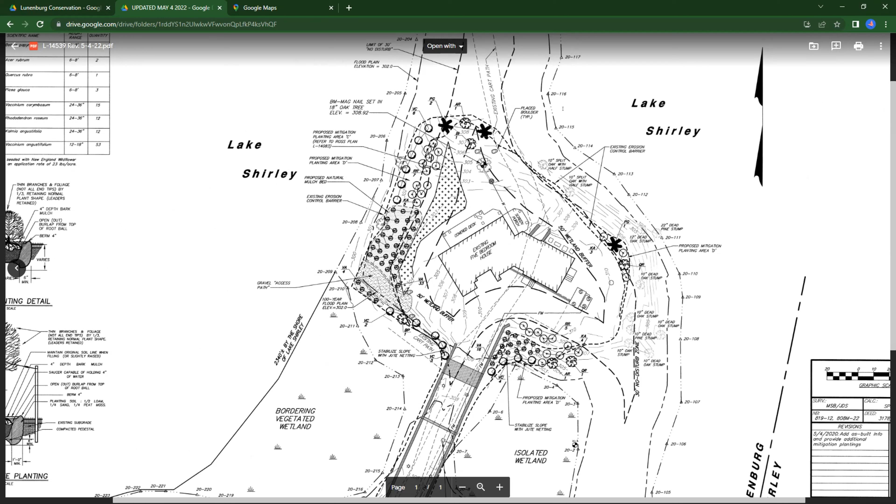Moving forward with enforcements, Matt, 615 Townsend Street. Okay, so just so you guys know, I'm gonna have to sign off at 9:45, so I want to go through this stuff as quickly as possible and get onto the certificates. 615 Townsend Street, still working with Adam and Casey to go over, there's like a multi-level requirement there.

441 Townsend Harbor Road, that can be actually taken off at this point because he's remediating as required. And we gave him an amended order of conditions, so we can take that off.

Do we need to vote to take it off, or is it just something you had added as the administrator? I just kept it, well, I mean, you have to vote to take it off. All right, I'll accept the motion to remove 441 Townsend Harbor Road from enforcement.

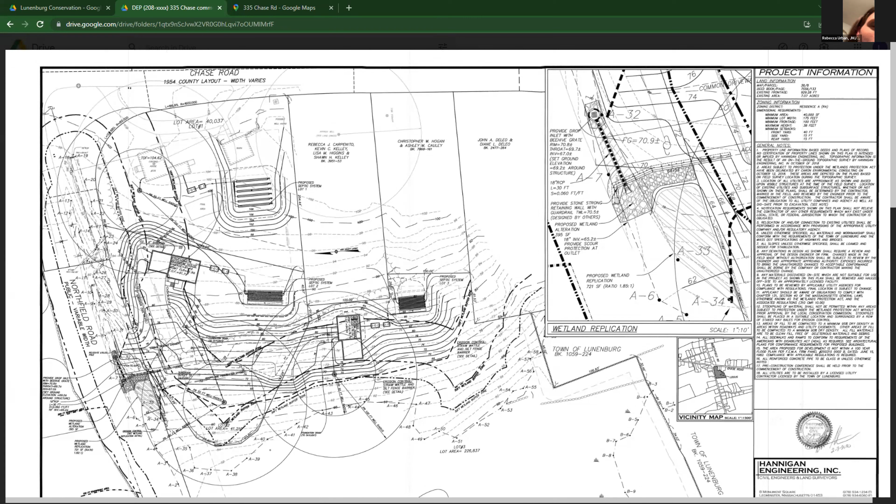Okay, so there was one also that they noted from, I think, the 1980s, which I have in mind. I think it was 1998, Rob. Sorry to jump in. Thanks, Rebecca. Okay, so if I could continue to have the floor here.

I'll simply make sure that all of the existing orders are referenced on the partial release. That's really all we need to do at this point. Thank you.

This is lot 1 up here, Matt? The existing house and just this septic system here? Yeah, the septic system was out of the buffer zone, so. Okay. And then these were the other houses down here. That is correct. Any other questions or comments from commissioners?

Seeing none, I'll accept a motion to issue an order of conditions for lot 1, 335 Chase Road. So moved. Motion by Jeff, second by, did you second that, Mike? Yes, I did. Any other discussion?

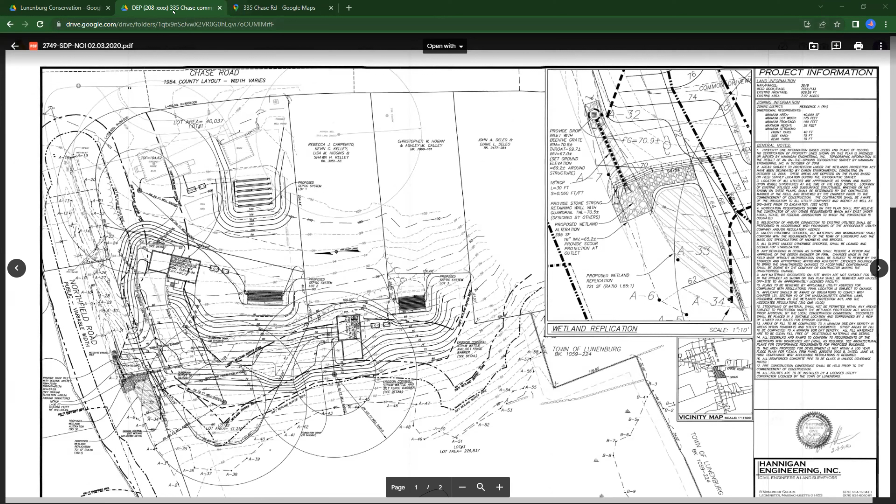All right, moving forward, certificate of compliance, 137 Flynn Road. Okay, before we get into that, it's on your cloud, Rich. They're requesting a partial certificate of compliance for the completion of the wall. The as-built is there. There's still some stabilization work that needs to be done on areas that weren't affected by the wall. So if we could do the release on the wall, that would be perfect. Again, it would be a partial and they would come in for the remainder later.

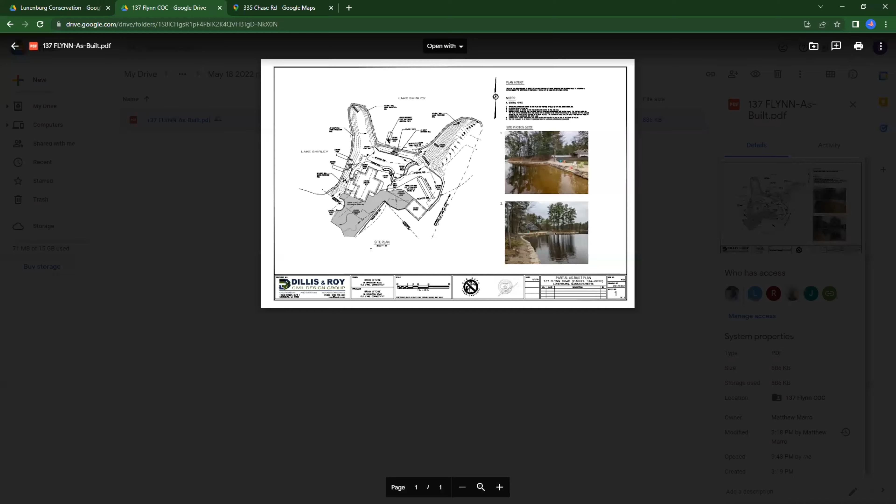And while you're calling that up, I just want to let you know that 939 Northfield is being withdrawn because we discovered, when I had Steve Marsden out on site doing the certification letter, there were still some areas that needed to be stabilized. So the builder is going to loam and seed those and bring that back for the June 1 meeting.

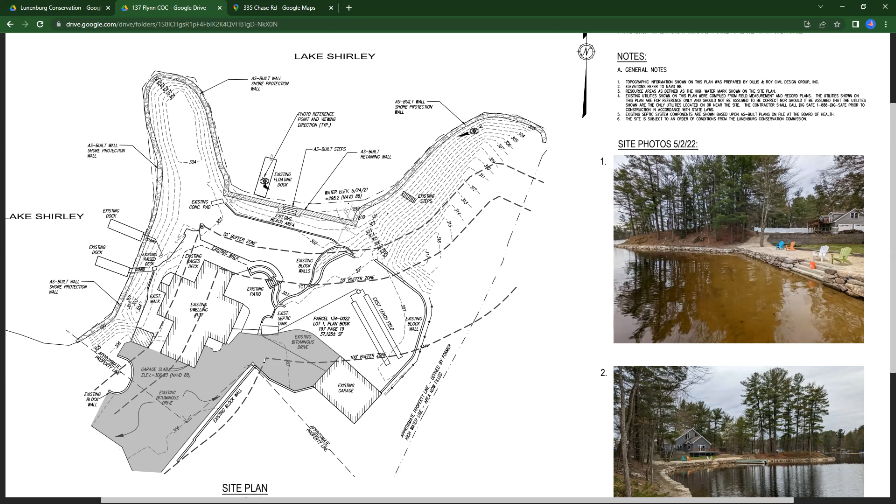Okay. I guess I didn't quite hear what you said. Why are we issuing just a partial on this and not on the full wall? If you look at the site photos, it's for the wall itself. And there's still some areas of work on the grounds, respective to remediating tree plantings that still need to be done and some stabilization work. But the wall itself is done. It's stable. Mr. Ramsden actually did a marvelous job, did it in accordance with the order. And the as-built shows this.

I guess I'm going back to why we're issuing a partial on the project as opposed to waiting until the full project's done. That's what the applicant requested. Brett, what exactly is unstable? Everything was planted, seeded, loamed and seeded, and looking pretty good when I left. So I guess I'm confused too.

The request is for a partial certificate, not the full certificate. So that's what I forwarded, was the partial certificate. So I guess the question, Brett, is generally we don't break them up unless there's an overarching issue here. Why are you asking for just a partial certificate of compliance on the project and not waiting till the full project is completed? I thought the project was completed, so I'm confused as well. I was kind of surprised to see a partial, but I don't have a problem with the certificate being issued. Project looks really well done. I don't have any issues with it, but again, I forwarded what was requested.

Okay, did you go out and see it on Saturday with the site walk, Matt? No, I didn't go out and see it on Saturday. I went out and saw it by myself. I'm thinking they're a little confused that they needed to do a partial for some reason. I'm not sure why that would be. This is Brian Ritchie, one of the homeowners. My wife filed it, so I'm thinking she filed it wrong, because we have done the plantings. We have loamed it.

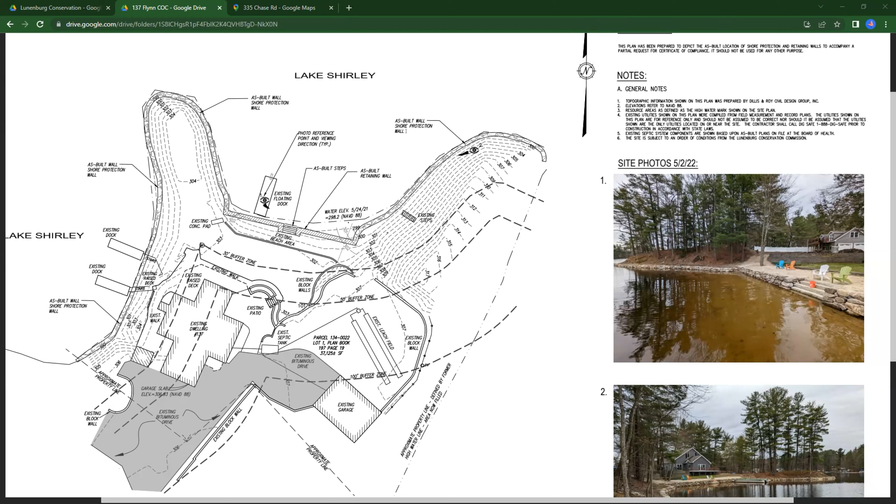Does anybody want to see the project prior to issuing a certificate of compliance? I just have a question, Rich. Go ahead, Jeff. On the west side by the two docks, there was a deck area with a large tree. Are you going to replace that deck area and replant in that area? I guess that's the only spot that's in question for me.

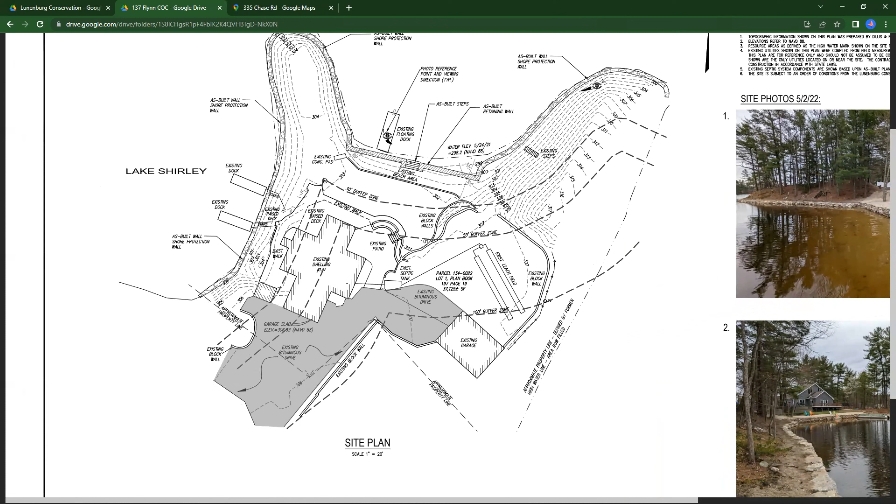We did plant a few dogwoods over there, and we are going to put that deck spanning back, attaching dock to dock. That's the only thing left to do. Okay, so I just didn't know if that was the reason the order is remaining open, because that deck's not completed.

That's correct. Okay, so the deck is not completed yet? It is not. At what point, are you looking to complete the deck this summer? Yes, hopefully in the next couple weekends. Okay, at this point, unless you have a reason that you have to have a partial certificate of compliance, we really can't issue it if the project's not completed yet.

Okay, Mr. Chairman? Thank you, sir, sorry about that. Where they said they had their existing docks, right? They've been there and all they're doing is replacing the docks. Would that be any reason to hold up the rest of it, even if it was a partial? Why wouldn't we just give them the partial? Because we still have to come back and issue the rest of it anyways. I mean, might as well just do it all at once.

If there's still work that was in the application that is not completed, we can't issue a certificate of compliance because it's not completed, if it's work they had to file for. So that would just be my recommendation at this point, is to just hold and wait till the project is completed and then view whatever's left, and issue a certificate of compliance when it is completed, if there's no overarching reason as to funding or selling the house or anything like that, to issue the partial at this point, because we still have to come back and issue more anyways.

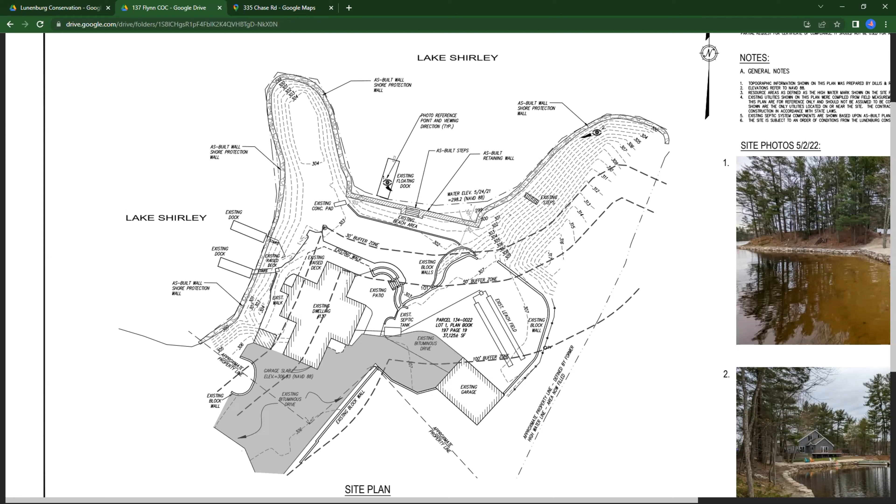Rich, that one's being withdrawn. I had just narrated that, but I do have, if I could share my screen, a certificate that I talked to Bob about that he was allowing. Okay.

So what we have here is a 30-year-old order of conditions filed. The file number is 291. Considering we're up in the upper 1200s, that shows you how many years ago it was. It was in 1992, for the Keating property, which is relative to the sale of the large lot across the street that is slated to be developed for warehousing, across from where there's warehousing being developed now, which is going to be subject to a new notice of intent. This particular order was very old. It had no requirement for an as-built. There's no file that I can find because it's so old, which means it may be sitting up in the attic in some back corner upstairs in the old town hall. Basically, the only condition was follow the plans and the notice of intent.

Mr. Chairman, if I could be recognized, my name is Mark Bedanza. I'm an attorney in Leominster, and I represent the Keating co-tenants who own the underlying land here, much of which is leased by the PJ Keating Company. We ran into this problem, and Mr. Morrow was nice enough to assist me with it in doing one of the conveyances that is related to the development that Mr. Morrow just mentioned. There's a significant amount of tax base being added up there to Lunenburg, quality industrial development that's in process.

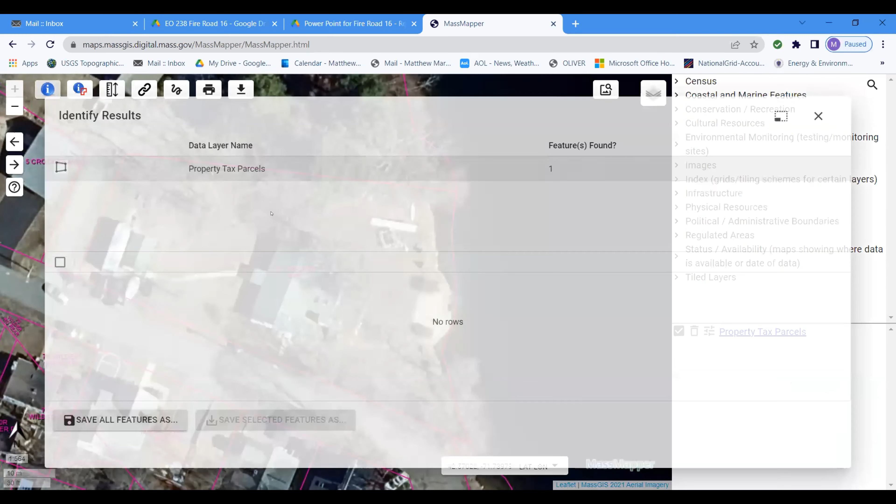The buffer zone essentially ends right about here. I can do a measurement for you really quick. I have these trees marked by photo, and for some reason this thing has decided to act up on me. So we have, you can see right here, 88 feet. This tree is within the buffer zone. He wants to remove these trees that are out of the buffer zone. There's one tree on Brad Kennedy's property that's about 75 feet away. Let me put it, actually it's right here. It's an old pine.

He wants to either remove it or limb it. And the owner here, they're doing it together, wants to remove this tree here. If I can do a quick measurement, that one, to the closest point, is 55 feet away from the tree crown. To the tree stem, it's 66 feet away. He's not proposing any replanting, but he is proposing to remove these trees, and there's nothing proposed to be removed by the shoreline or within the 30-foot zone. That's it, just these trees here.

I do have photographic records of it, but I wanted to do the overlay because it represents the distances better. Does anybody have any questions on the agent's determination?

I'm gonna worry about putting all this away because. I'm sorry, say that again? It sounds like someone's talking in the background.